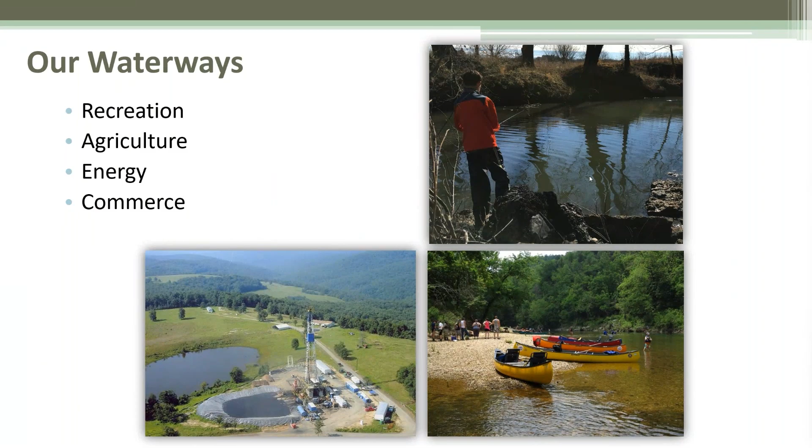So in just thinking about our waterways, water is used for a number of things: recreation, agriculture, the energy sector, commerce. There are all types of reasons that water is important. Not all of those relate to roadway construction, obviously. And if you look at it from just a personal standpoint, we are very insistent that we have clean water. I don't want to drink water that's contaminated.

And for the most part, I think a lot of us actually buy water bottles to make sure we have clean water, or we buy filters so that we can use filtered water and that type of thing. So as a culture, I think that we all feel like clean water is absolutely necessary to our day-to-day activities.

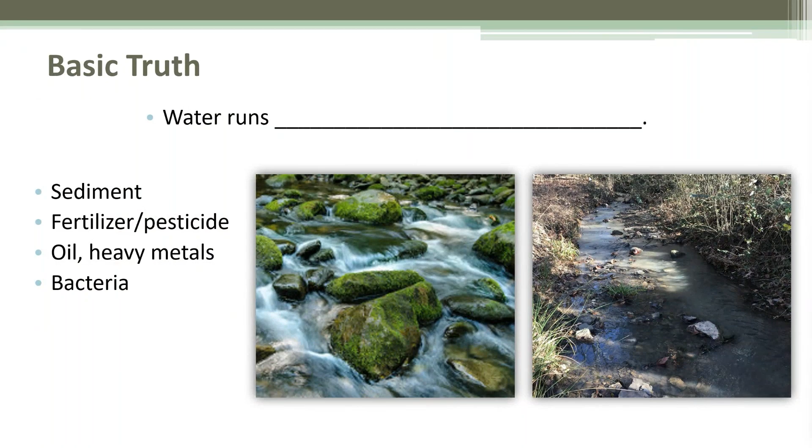So one of the things I want to start out with that is kind of silly, but water runs downhill. We all know that. That's not new.

Good news is you didn't pay for this webinar. So it is a free webinar, free information.

But the important thing about this is that when we start looking at a lot of the other details of this class, it's all going to stem from the fact that water runs downhill. So if the water runs downhill, anything else that's in that water is also going to run downhill with it. So sediment, that's going to be traveling downhill as the water moves.

If we have any fertilizers, pesticides, oils, heavy metals, bacteria, anything that's counterproductive that's in that water source, it's going to be traveling downhill. So all of those things are in motion and they're going to go other places. And usually those other places tend to cause some issues over time.

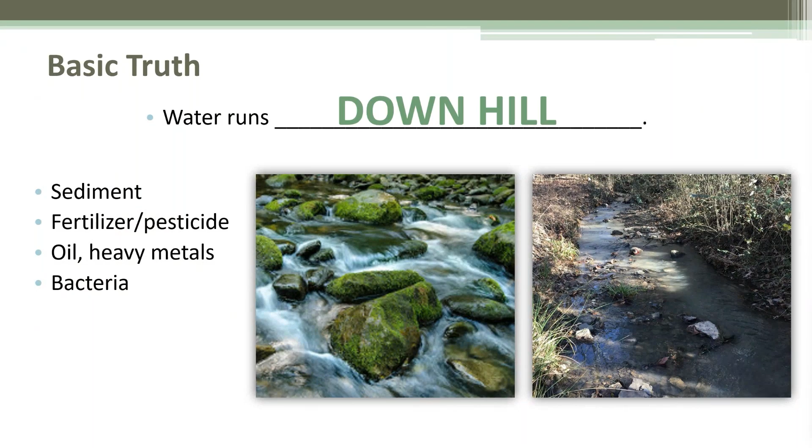The other thing we know is that water is extremely powerful. The more water you have and the steeper the slope that it's on, the faster it's going to move. So increasing the volume and increasing the velocity is going to give that water a lot more power. So think about Niagara Falls. It's a fantastic place to see. I recommend that everyone go there just to see that, but it really brings home how much power that water has. So when we have a heavy storm event, it makes sense.

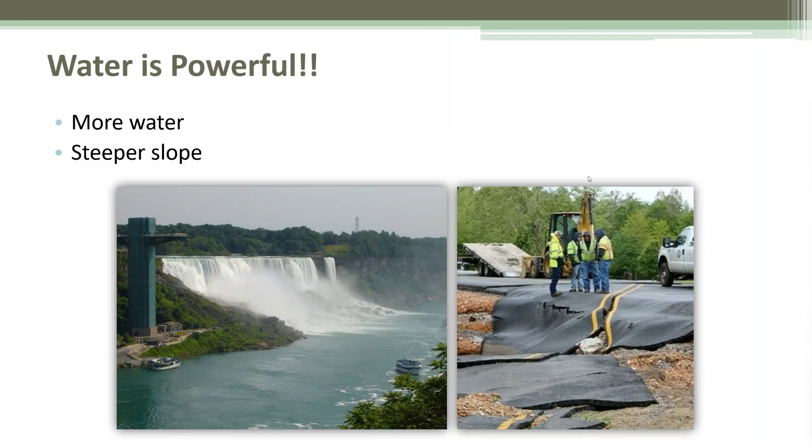Along with that, construction is widely known as one of the biggest reasons that we have erosion and sediment. We're one of the major actors in some of the sediment, which is considered a contaminant in our water sources. So if you look up stuff, way back, we're looking at 30, 35 years ago, this has been a thing. And we've taken steps and made progress in doing a better job. And that's really what this entire program is that we're going to be talking about today, is doing a better job of not being the bad guy, so to speak. But construction still kind of has that stigma.

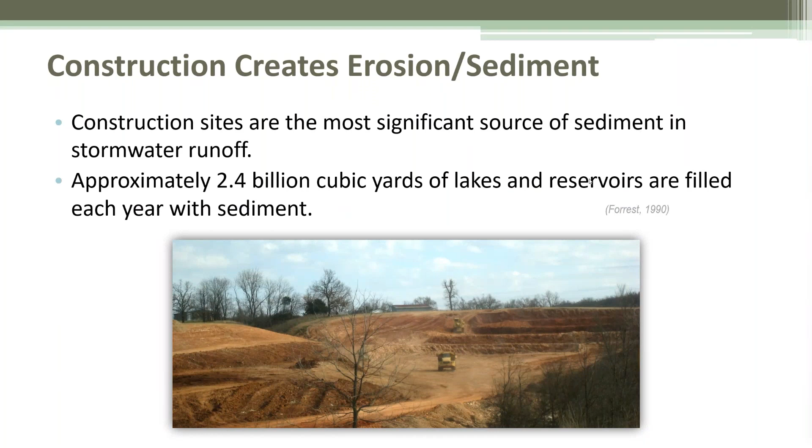So lots and lots of lakes and reservoirs are affected by sources of sediment every year. And when you think about that water running downhill, maybe we've got a construction site that's at the top of a hill, and any erosion and sediment from that runs downhill, because we know that's where it goes, it's going to end up going into some type of water body. Maybe it goes in a roadside ditch, then to a stream, and that stream leads to a larger stream, which leads to a river, which leads to maybe a lake. But those larger water bodies can tend to take on all of this sediment. That's kind of that ultimate landing point for the sediment.

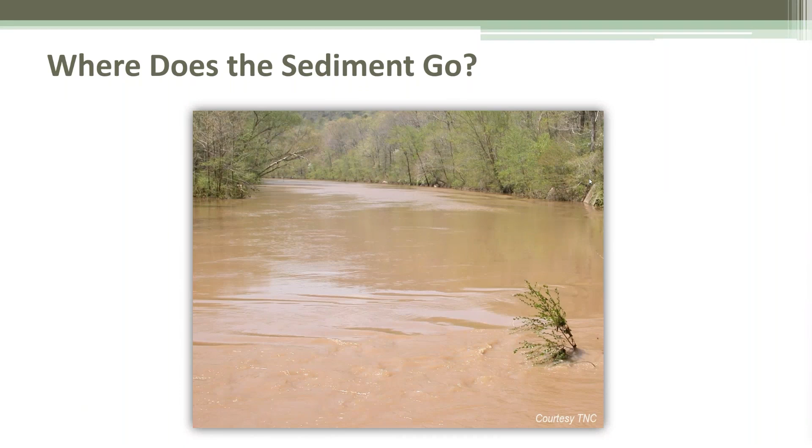And when we have too much of that in that water source, what happens if that water source is a public drinking water supply, or a number of things? But that sediment is going to continue to move downhill with the water, and it contaminates those larger bodies of water that we use for a lot of other things. That sediment can change the shape of the bottom of that water body. It can silt it in, and we lose some capacity on the bottom, and it just changes the dynamics and hydrology overall.

Now, erosion is kind of the culprit. This is where it all starts. And erosion is defined as the process by which the land surface is worn away by the action of water or wind. So this is where individual soil particles get knocked loose from their natural location. So things are kind of falling apart.

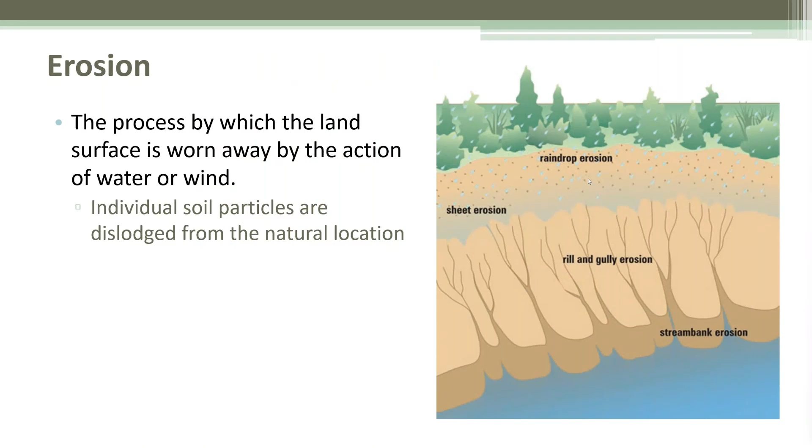There are a number of types of erosion. One of those is raindrop erosion, and that's erosion that stems from raindrops actively hitting the surface of the soil, kind of blasting those little soil particles apart. And so that loosens them or dislodges them.

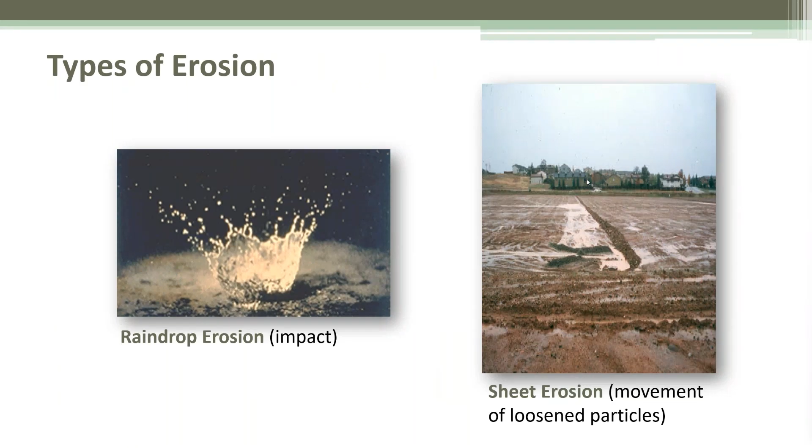We might have sheet erosion, and this might be a situation where we've got a subgrade or a pad built, and then we get a lot of rain. We have kind of that layer of water that's just sitting, but water runs downhill. So even if it looks flat, like what's in the picture, water is going to find the lowest point. And when that water tends to move as a sheet all together, we get the friction between that and the soil particles, which also causes those particles to loosen.

And that becomes a channel, which then is even more downhill. So a particle of water running down the slope will also kind of fall into those crevices and create a larger volume of water in that exact location, which makes it worse and worse. As that gets worse, then we might have what we call gullies, and that's a bigger channel of concentrated flow.

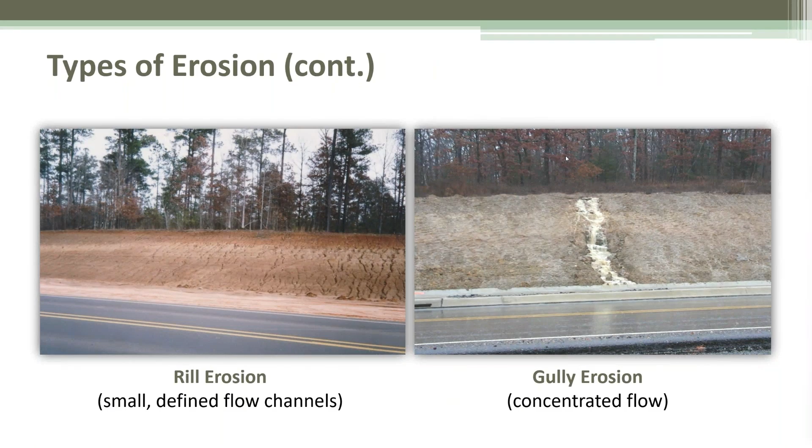But that is something that's sort of related to what we're talking about today, not necessarily directly, but a lot of times we have roadways that are nearby a stream. And when we start to see the shape of that stream change over time, and that scour moves the edge of the stream toward a roadway, that can start to encroach on our roadway structure.

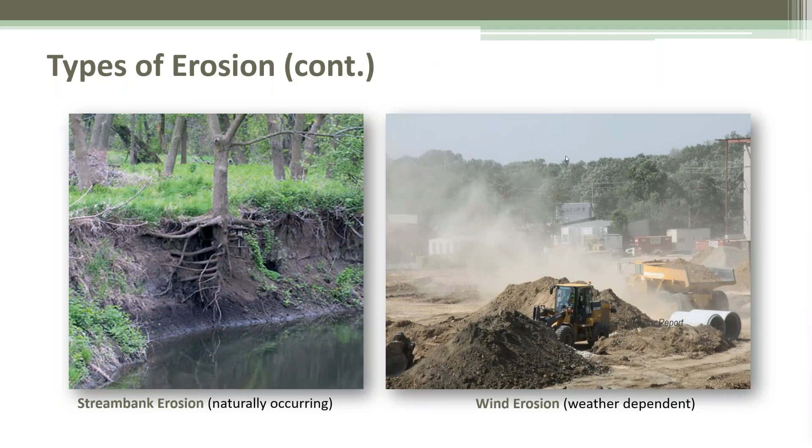And then wind erosion is one that maybe sometimes we don't think about as much. We think about water creating a lot of erosion, but especially out west, we have lots of times where it's maybe hot, dry, arid climate, but a lot of wind. And when those particles are able to be picked up and carried in suspension by the wind, then we've got soil particles that are dislodged from their natural location. Whole different kind of erosion there, but still we're losing some of that soil.

Now, sedimentation is very much related to erosion, but this is the part of the process where those soil particles move. And so they're going to go somewhere, and it's easy for them to move because the erosion caused them to come loose. Now they're going to move, and they're going to move usually in the direction that the water is moving because they're carried in suspension, or even if it's in the wind, in suspension with the wind.

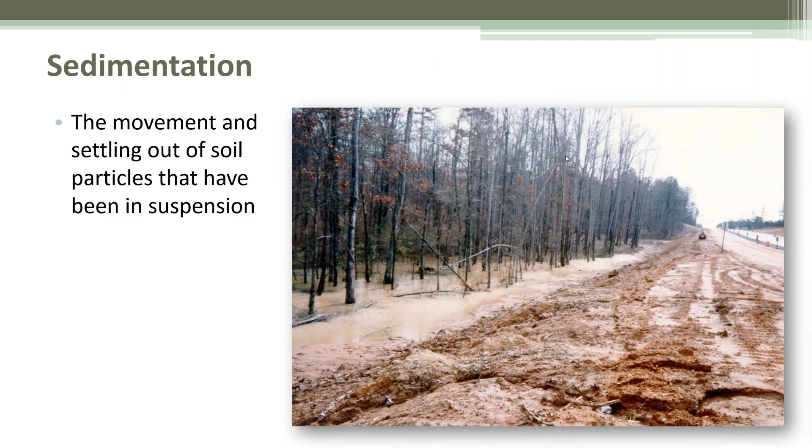The lighter the particles, the longer they're going to travel. The heavier particles will go for a time, and then they will tend to settle out because they're heavier. They will sink to the bottom, and eventually there won't be enough motion to carry them any further. So sedimentation is kind of where they move and then where they settle. So we'll see deposits of sediment in different locations that are downhill from where that particle started out.

Different soil types have an impact on how that actually happens. So sandy soils tend to have higher permeabilities. In the grand scheme of things, sands, silts, and clays are the sizes of soil particles. The sands are the largest of the three. They tend to be fairly spherical in shape, so bigger rounded particles. Imagine a stack of marbles or ball bearings. There are spaces in between those, so we have relatively high permeability and can absorb a lot of water.

So when it takes on that water, we have a little bit less runoff, and because those particles are heavier, those particles don't tend to go quite as far as some of the lighter ones. Now, silty soil, silts tend to have a similar shape to sand. There's still going to be those rounded particles, but they're smaller, so they pack together a little bit tighter. But since they're round, they don't grip together as well, and they're not heavy enough to hold themselves down, so they tend to be much more erodible. So even though they have a little bit reduced permeability, they are the small particles, and they will just take off when the water hits them hard enough.

Now, clayey soils, clay is a little bit stickier. The runoff doesn't tend to pick up clay quite as easily as silt because clay particles are a different shape. They tend to sort of stick together because they have that additional plasticity, and they stack together more like plates. They're fairly cohesive and stable, but they can actually be more erodible sometimes when they're dry. They're those tiny dusty ones. Clay is 0.002 millimeters or less when you take an individual clay particle, so very, very tiny.

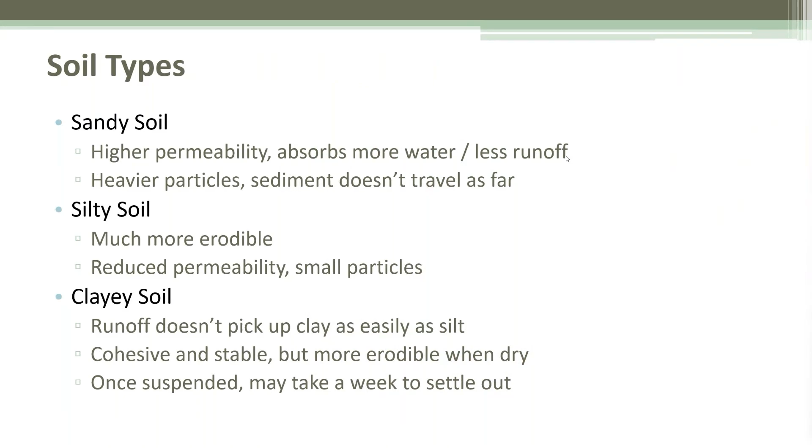Now, if we go back a bit in history, back to 1972, that was the time frame where the environment became very important in the context of national legislation taking place to protect the quality of our environment. So you saw the Clean Air Act, the Clean Water Act, and so on. And the Clean Water Act was specifically to protect the health of U.S. waterways. And to do that, they developed a system called the National Pollutant Discharge Elimination System, or NPDES. That is a program that's administered by the EPA specifically to provide for that national legislation. The Clean Water Act essentially says, don't pollute the water. NPDES says, here's how we're going to make that happen.

Almost every state in the union also has a state level agency. In Arkansas, it is the Arkansas Department of Environmental Quality. It was ADEQ. Technically now it's the DEQ, but I think most folks still refer to it as ADEQ, so same thing. They are the ones who actually issue the stormwater permits. So at the state level, they have a lot more active oversight. The EPA has oversight of each state, and so on.

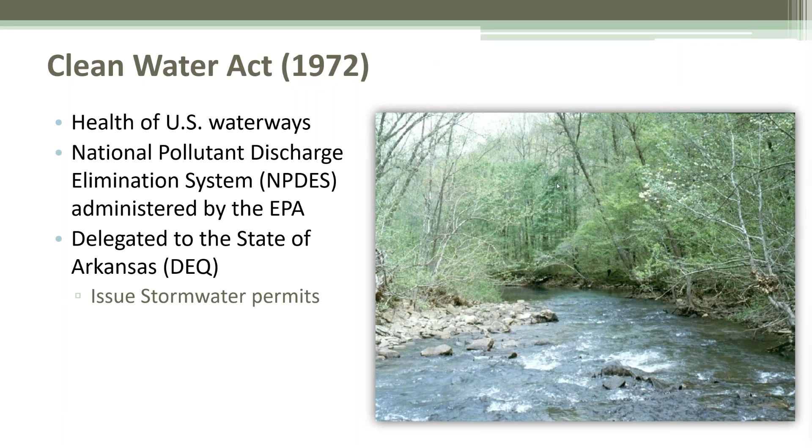In Arkansas, we have some laws that deal directly with the fact that we're not allowed to pollute waters. One of those says that it shall be unlawful for a person to place or cause to be placed any industrial waste or other waste in a location where it is likely to cause pollution of any waters of this state. There's another one that says that it shall be unlawful for a person to purposely, knowingly, or recklessly cause pollution of the water in a manner not otherwise permitted by law. Overall, there is no manner that is permitted by law because it's illegal to pollute our water bodies.

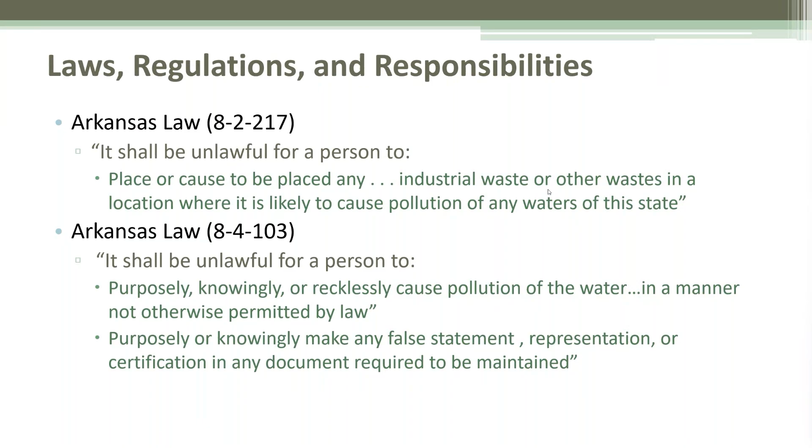And another part of that says that it's unlawful for a person to purposely or knowingly make any false statement, representation, or certification in any document required to be maintained. And today we're talking about regulations and documentation. There's a lot of documentation that goes along with stormwater permits, NPDES, and all of that. Now, if we don't follow the rules, we don't play by the book, and we violate those laws, then there are penalties that will have to be paid.

So we have to have a permit to do soil disturbing type activities. If we go on without getting the proper permits, or maybe we violate that permit in a serious way, it can be up to $16,000 for a violation. If that happens to also include an endangered species violation, that number goes up to $25,000 per violation. And that doesn't sound like the end of the world.

It's definitely a lot of money, but consider that each additional day that violation is active, it's considered to be a separate violation. So if you were penalized for a situation and it took you 2 weeks to get that resolved, that is $16,000 times every day that violation still exists. That's going to add up very quickly. And then above all of that, the EPA can also assess civil penalties. As far as I know, they've not increased this at this time, but up to $187,500. That one's pretty significant.

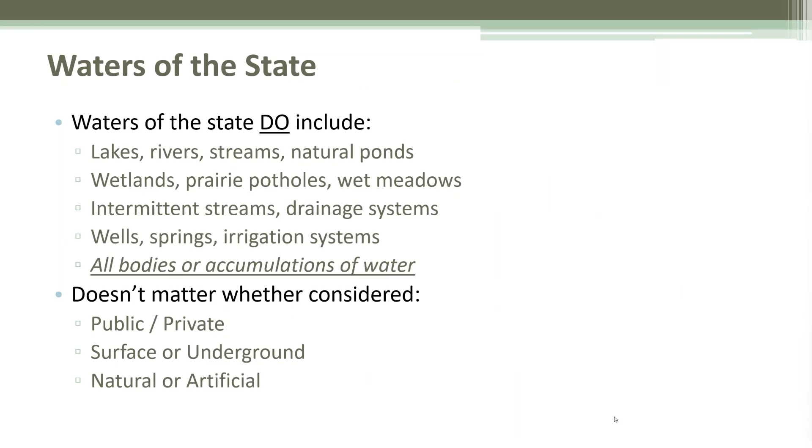We have steeper topography. We have a lot more variety of elevations. So when we start thinking about water moving downhill, the steeper the slope, the faster it goes. So we have a heavy rainstorm and things move pretty quickly. They're going to flood quickly, they're going to clear quickly, whereas the south and east portion of Arkansas is much more flat. So there's a lot of area for the water to go, but if it floods, it takes forever for it to work its way out, or I guess sometimes it just has to evaporate.

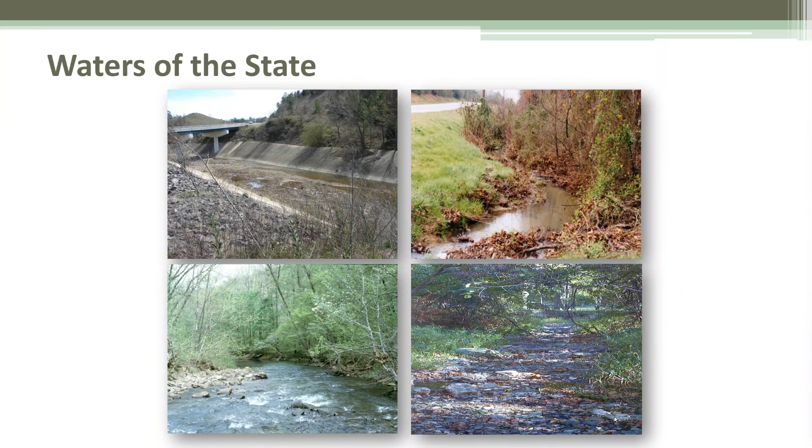But it's a whole different dynamic in how we're going to deal with these because of the differences in the topography. But the more hilly areas you have, the more likelihood you have of those intermittent streams.

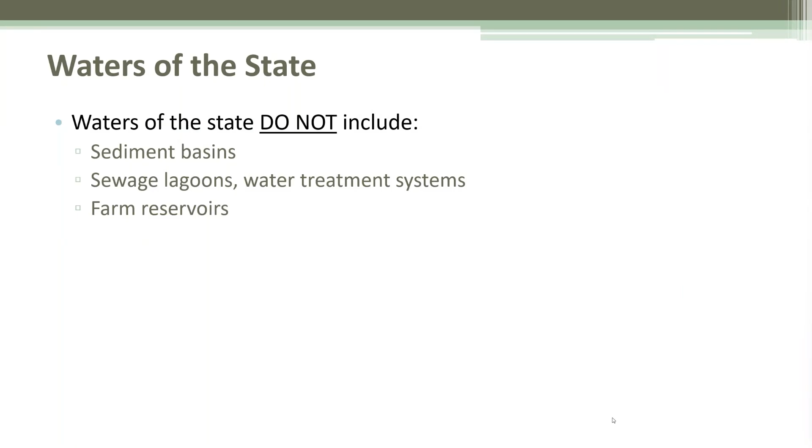Now, there are 3 categories that are not included in waters of the state definition. One of those is a sediment basin, and that is one of the best management practices that we'll talk about next time. And it's designed specifically to assist with erosion and sedimentation. So for all of this NPDES stuff, this is one of the ways that we're going to manage and keep our water clean. So obviously it's designed to include sediment, so we're not going to count that. And then also sewage lagoons, water treatment systems, those have their own set of rules. And then farm reservoirs are also considered exempt.

In terms of authorities, we've mentioned ADEQ. We've talked about the EPA, the Environmental Protection Agency. That is the national level that oversees the state level agency. But we also might interact with U.S. Army Corps of Engineers. We might interact with U.S. Fish and Wildlife, Arkansas Game and Fish Commission. We might interact with an MS4, that's a municipal separate storm sewer system. And a lot of the cities and towns in Arkansas will be part of an MS4.

Then there's also a QLP, that's called a qualifying local program. And that is kind of like you have the EPA, then you have the state level agency. If you were to have a local level of that oversight, that would be a QLP. Hot Springs is the only one in the state of Arkansas right now. Their whole name is Hot Springs. They're all about water. They have a lot of tourism. It's very important for them to protect the quality of that water.

And so essentially what's happening is that ADEQ says, hey, Hot Springs, you obviously see the importance of keeping your water clean. We're going to turn over all of this oversight to you. You will issue your own permits and do your own thing. You will kind of take care of anything for a smaller job site. For large job sites, ADEQ still has the authority, and then ADEQ will oversee that QLP and just make sure that they're doing what they're supposed to do.

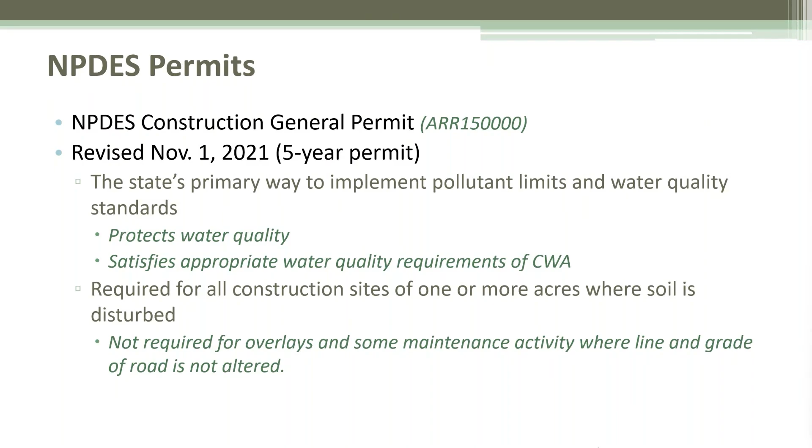All right, so we know that if we disturb an acre or more, the permit is required. Aside from that, we also have 2 categories of project size, and that is either small or large. A small site is considered less than 5 acres. A large site is 5 or more acres. Now, big picture is that it doesn't matter what size. If it's 5, more than 5, less than 5, doesn't matter. We're going to do the same things on the ground that need to be done to prevent polluting those waterways. But there are some distinguishable points that paperwork is going to be different. So the things we do will be the same on the site. The paperwork that we have to prepare will be a little bit different.

So in general, just think of it as we're going to treat everything as a large site. ARDOT actually states that every project is considered or treated as a large site, just paperwork is different. Keep in mind that things like clearing, grubbing, excavation, demolition, constructing a haul road, all of those things that sometimes are extraneous to the core area of the project itself, those are ground disturbing activities, and those are going to require the permit as long as it's an acre or more.

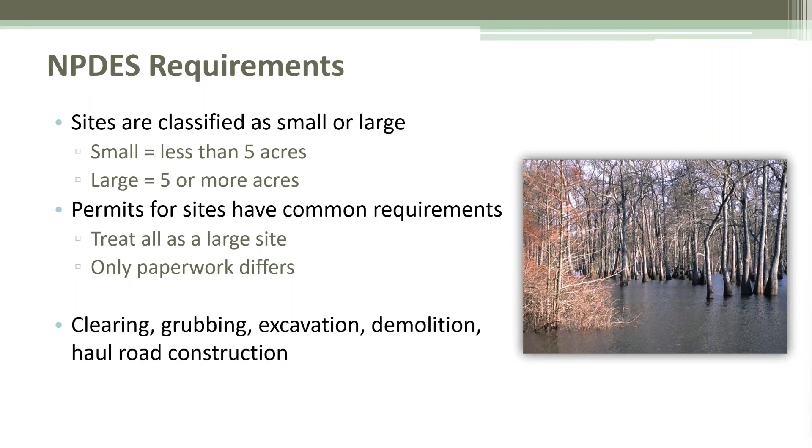So do you need a permit? If it's new construction and a large project, which means 5 or more acres, yes. If it is a small project, less than 5 acres, that's still going to be a yes if an acre or more is disturbed. If you are doing maintenance, grading your unpaved roads, you do not need a permit. If you're doing patching, overlays, chip seals, you do not need a permit. If you're widening, you do.

If you are cleaning out ditches, you also need the permit because that is actively disturbing the ground and it's in a location that we expect water to accumulate. So technically, a ditch is a water body. So that would be operating, doing work, and disturbing the ground in a water body. So that's kind of a picky difference, but that means we've got to be really careful for something that you might think of as just kind of everyday cleanup. We've got to have the permit to do that.

Bridges and culverts. If I'm doing that type of construction and I'm in the immediate vicinity of a water body, then yes, we absolutely need the permit, but we're also going to need a lot of other things. We'll talk about those later. The STAA, short-term activity authorization, 404 permit, and so on.

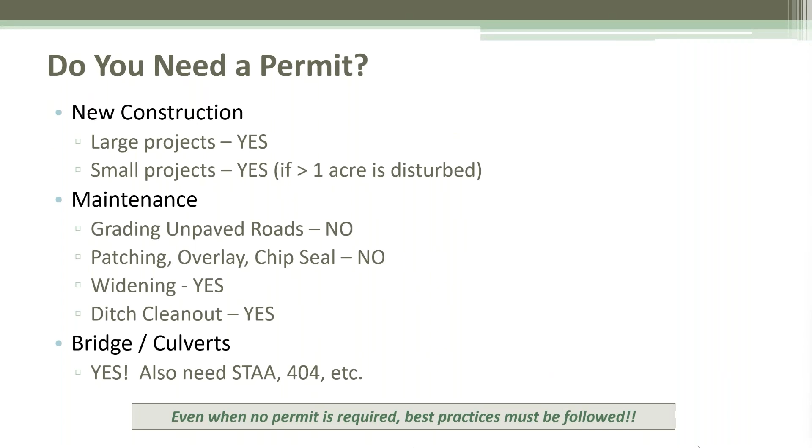But all of these things, I'm telling you, here's the letter of the law. But in concept, it doesn't matter if you need the permit or not. We're still obligated to follow best practices and try to keep as much sediment out of our water bodies and the potential for sediment in water bodies to an absolute minimum. So even if you don't have to have the permit, you're not excused automatically from everything.

All right, the permit process. How does this work? Well, ADEQ or DEQ has to know that you intend to do a project. So the first step is to submit what's called a notice of intent, the NOI. You will also prepare a stormwater pollution prevention plan, which I call a SWIP.

I've heard it called a lot of things, SWIP, swoop, swope, SWIPy, SWP, SWPP, all that kind of thing. It's the same thing. It's the big document with all of the information. So we're going to complete an application online that says, hey, ADEQ, I've got this project. Here's what I want to do. That notice of intent tells them some of the information about that project. The SWIP tells them a whole lot about that project. And we have to submit those 2 items at least 2 weeks prior to the start of work.

Now the NOI form, there was a form that you could print off and then everything's gone digital. It's great. The e-portal is much faster, much simpler, and you get results a lot quicker. So I don't have a copy of that form in your handouts to show you, because it is all online. So you create an account, you submit your info, it goes through the channels. There is also a fee. Now, this is for kind of the large site, big construction project.

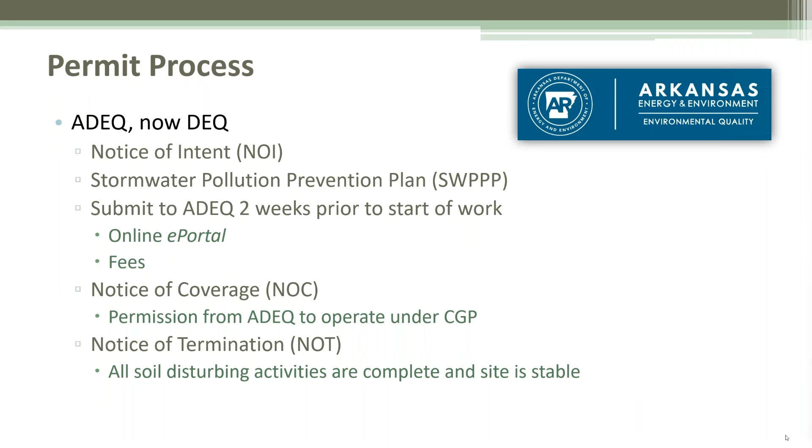Now, work in a water body. This is a little more sensitive because if you lose any sediment from your job site, it's already right there at a water body. So you have very few chances to catch it before it can contaminate that water. So anytime we're working in or in the immediate vicinity of a water body, this is going to be things like bridge or culvert construction. If you're putting in culverts, box culverts, pipe culverts, if you're doing any channel alterations, even debris removal, trying to clean out a stream to maybe promote some of your drainage pathways. A lot of maintenance activities kind of fall in this category as well.

Then you have to not only get permission from ADEQ, you also have to get a 404 permit. That comes from the Corps of Engineers. So that is referring to Section 404 of the Clean Water Act. And that is going to use a little bit different definition for your water bodies. Instead of waters of the state, it's going to be waters of the United States.

The overall definition tends to deal a little bit more with waters that are used for commerce, like things along the coast where you may have offshore fishing, any type of commerce that way. Arkansas doesn't deal with that because we obviously aren't on the coast, but still the language is going to kind of route us right back around to what we've already used for waters of the state.

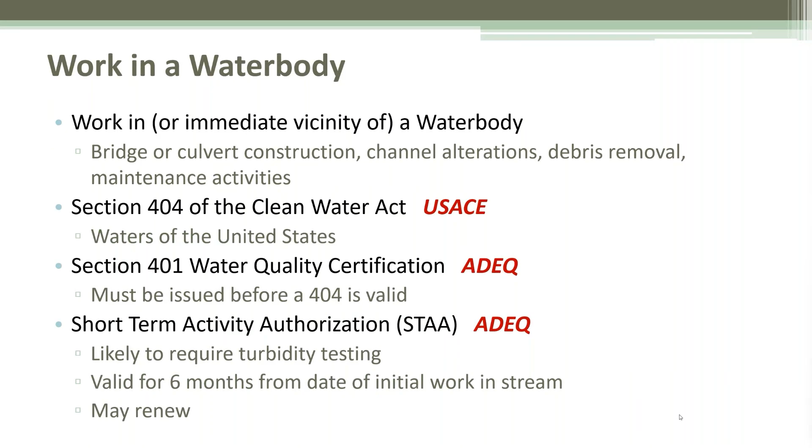And then also during that 6-month time frame, they're almost always now requiring some turbidity testing. So there are some testing requirements, and you have to submit those results periodically. So what is turbidity? Turbidity is kind of a fancy word for dirty water. So it's technically a measure of the clarity of water, and it can be measured by passing a beam of light through a sample of the water.

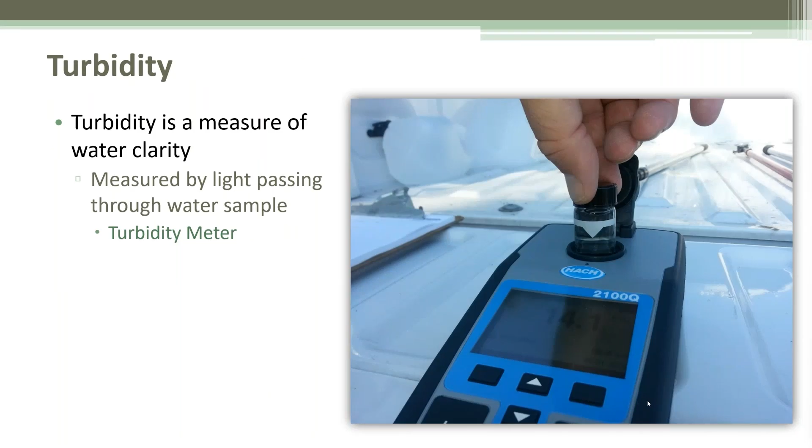So that turbidity meter is pretty cool. It kind of does it automatically. You put it in, push the button, and it gives you a number. And so then you report that. I will say that if you use one of these, make sure that your little glass sample containers, keep those clean. If you have smudgy fingerprints on the glass, that will read as turbidity because it's something blocking the light. So make sure that you keep the outside of that sample container as clean as possible.

Now, turbidity we don't like because that's an indication that we have sediment in the water. It's murky, it's ugly, it's not a good thing, but it's more than just dirty water. Those suspended solids that are caught up in the water not only affect clarity and color, but also increase the temperature of the water. When you increase the temperature, that will decrease the amount of dissolved oxygen that's available to the wildlife, the fish, and other species that have their habitat there in that water body.

So sometimes you see a lot of increased disease in fish. Some of it is not that something poisonous went there. It's just that we've reduced their dissolved oxygen to a point that they're not able to survive. So it has some far-reaching impacts. And then, you know, everything in nature depends on something else. So it continues to make that chain reaction go along.

All right, so let's back up and talk in a little bit more detail about before construction, submitting that notice of intent. The large sites are required to submit this NOI 2 weeks before beginning work. If it is a small site, you don't actually have to submit this, and that's because they're going to charge, it was $200, it may have gone up at this point, but the large sites do have to pay a fee. And then ADEQ reviews the documents. The big document is the Stormwater Pollution Prevention Plan. This is a complete plan for your project.

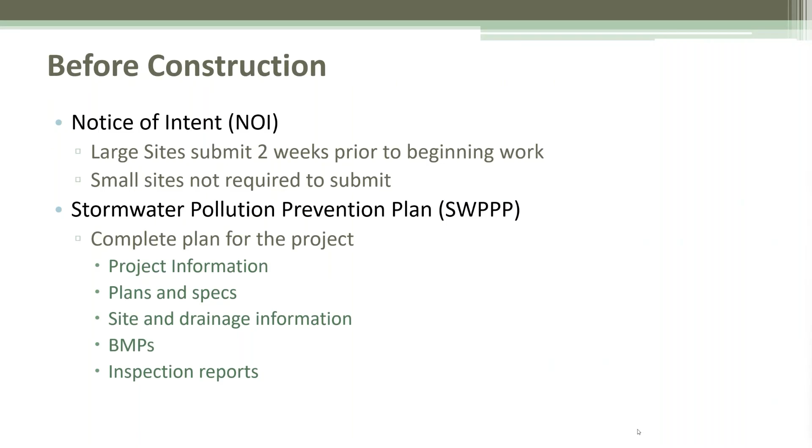So where can you find information on how to do this? Well, if you go to the website for the state of Arkansas, it's adeq.state.ar.us. Down on the left-hand side, there is a button for water permits. When you click there, it will expand and scroll down to the NPDES permits, and there's a list of things there. One of those is the general stormwater permits, and there's one for construction stormwater. That's the one that we are talking about.

On that page, there will be links for some of the forms that you need. There's a link to the permit, some fact sheets. They have most of their forms in PDF or Word form. And again, some of this I'm still showing, but it's actually to be submitted online. There's an inspection form, notice of termination, all kinds of stuff there.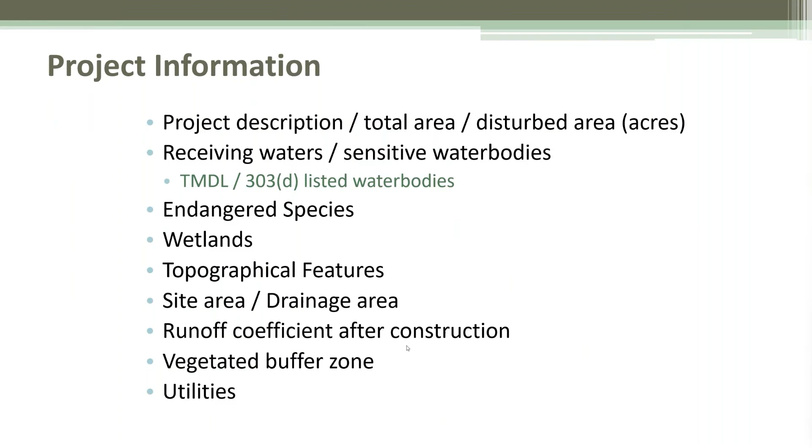We need to know about the drainage area. If my project site is in a low area and I've got a lot of water running toward my project from higher elevations, that's going to impact how I treat things. We'll look at runoff coefficient after construction. Vegetated buffer zones, I've got to leave some space before I get to a water body. And then also utilities.

Now, receiving waters. Well, I'm doing a project and I don't think there's a stream or a lake or anything anywhere close to it, so I don't have a receiving water. Well, there is always an ultimate receiving water. And on the website, there's a map you can pull up.

And if you locate your project here on the map, let's say, I know City of Bentonville is watching with us. So if we're up here in section 3J, the northwest corner of the state, number 3 goes to the Arkansas River. So the Arkansas River comes in on the west side, runs down through central Arkansas. That means that if I have sediment that gets loose from my project, it's going to move and travel and go from point to point and follow the path of water all the way down to the Arkansas River.

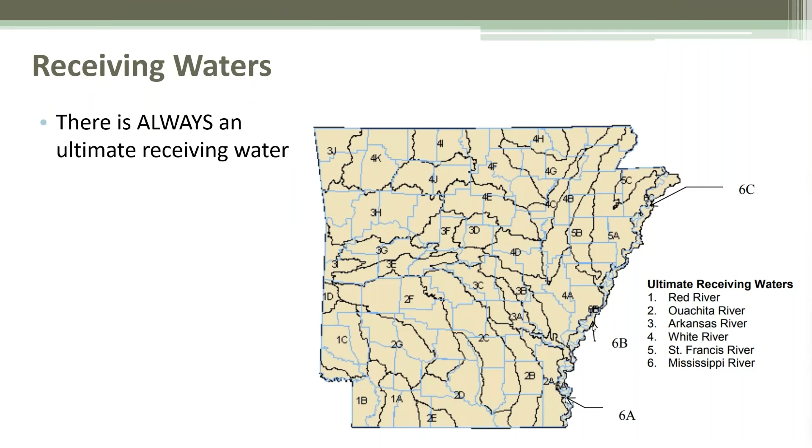Now, if I'm more in the north central portion, all of these are number 4s. Number 4 is the White River. That means ultimately a problem in my project location has the potential to impact the White River. Okay. Down in South Arkansas, we've got the Ouachita River, and the 2s, the Red Rivers, and the 1s, St. Francis River, there's the 5s, and then 6 is going to be the Mississippi River. So there is always an ultimate receiving water. If you're not sure, look at the map.

Now I mentioned the impaired waters, the 303D list. These are water bodies that already have some sort of an issue. And it may not be anything related to construction. Sometimes it is. It could be that they already have maybe a natural problem with sediment, or something else has happened that's created that problem. Sometimes it's a chemical. Maybe it's some sort of toxicity. Maybe the pH level is not good. It could be too many nitrates.

Whatever that problem is, from whatever source it is, we know that there's already a problem there, which means I've got to check this list and see what the problem is, and then determine if my project is going to create more of that same kind of problem. If so, I've got to be super, super careful to not let that be a problem.

The official listing tends to run several years behind. I think last time I updated this, the 2018 was official, the 2020 was still a draft, and that was just a few months ago. So slowly but surely those do get updated. I would look at the draft listings and get the most updated ones. But they do have maps by county.

So on the overall state map, you can see there's little pink lines, little yellow lines, and you can see in the legend what category of impairment that is. And so most of the things that we are concerned with in construction are ones that are already impaired for turbidity, for sediment, and then possibly oil and grease. Those are the kind of things that we're going to see during construction. So if I know that my water body already has that particular problem, I'm probably going to make it worse with my project.

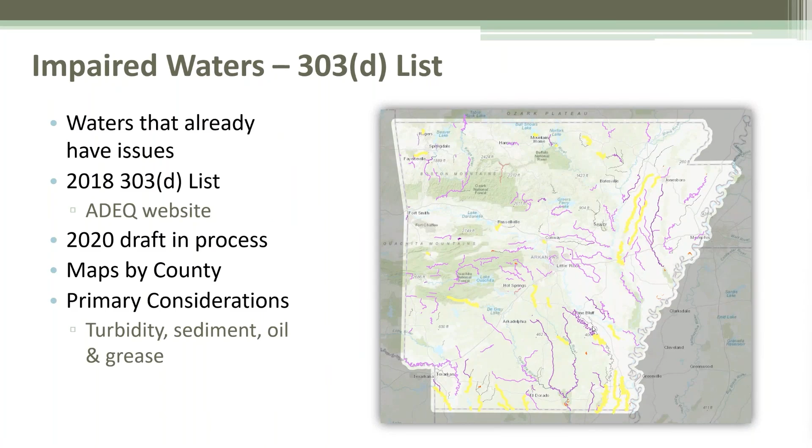There are other water bodies that have special protection, and there are several designations for that. One is ERW, that's Extraordinary Resource Water. Ecologically sensitive water bodies, natural and scenic rivers, public water supplies, cold water fisheries, and then impaired waters also fall on this list. Again, we need extra protection because there's something special about that water body. It might be like the natural and scenic, the Buffalo River, high profile. It's a big deal when something goes wrong or there's a contaminant that's getting into that river.

If it's a public water supply source, that one's kind of obvious. If you have a contaminant that gets in there, that has a big impact on the water treatment system that cleans it for the constituents of that water source. We've got to be able to get it clean. If you put too much contaminant in and can't get it clean, that will impact all the citizens of that area.

The city of Clinton a number of years ago had to invest a lot of money to upgrade their water treatment system specifically for sediment that was in their water. They weren't able to keep up. So it has a huge impact on funding and improvement. So if we could just keep that sediment out of the water in the first place, that makes everything else much easier.

Now, the other term that's on this slide is the TMDL, that's total maximum daily load. That refers to the fact that a water body might already have something, whether it's naturally occurring or is already there for whatever reason, plus the effects of construction. If your project is close to a water body that has a designated TMDL, that means that the total cannot exceed a certain amount.

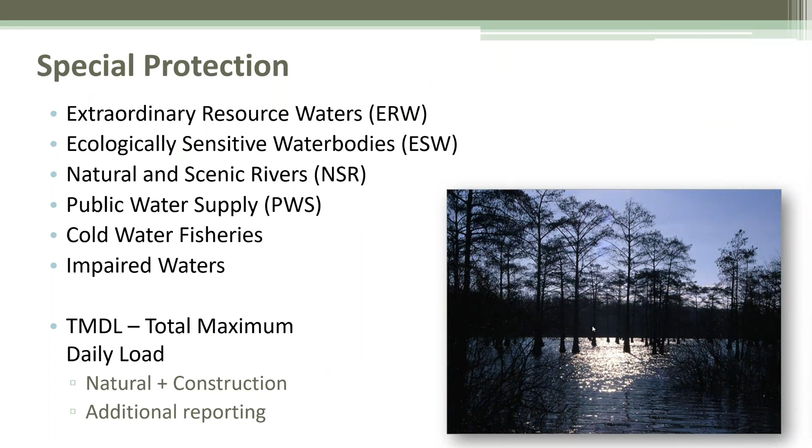Endangered species. This one is the hardest one of all in my mind, just because my background expertise is more in roadways and asphalt and construction, and I don't know much about endangered species. So part of this permit process is to certify that I've done my homework and don't see any issues with an endangered species. I don't really know that. So it's hard for me to feel confident in signing a piece of paper that says, hey, there are no endangered species on my project site. I don't really know that.

There are rules for what you can and can't do within things like 660 feet of a bald eagle's nest. I don't know where those nests are. I don't know where the Ozark big-eared bat lives exactly. But the good news is there are people who do. So U.S. Fish and Wildlife has a lot of information on their website. And really what you're doing when you submit this part of the certification is that you're signing to say, I did the best I could to figure this out. I'm aware that if there is an issue, some things may have to change during construction, but I've done the very best that I can to show that there's not an issue with an endangered species.

If you work for ArDOT, ArDOT has an environmental division that deals quite a bit with this, and they know these kinds of things, so that's great. Otherwise, I would say check the website. U.S. Fish and Wildlife can let you zoom in on endangered species, and they will have color-coded maps that show where you are most likely to encounter some of these certain species.

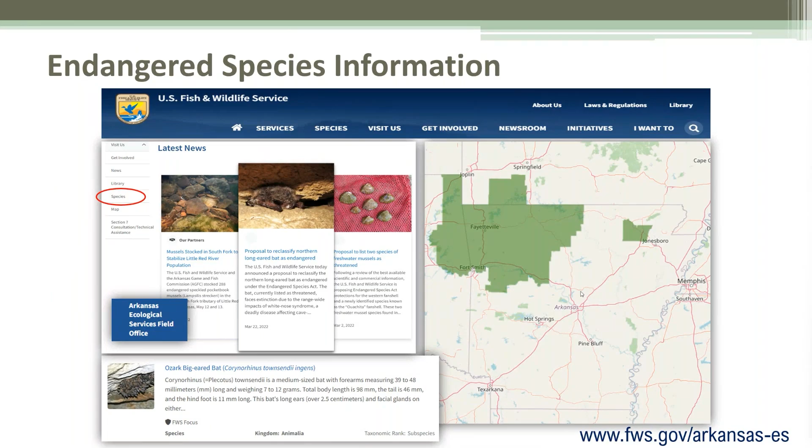So in the northwest corner of the state, the Ozark big-eared bat, they give some information about that, and that would tell me that, hey, I might need to check in on this. Or if I was in central Arkansas, that part's not in green. I know I don't have to worry about that one. That's not likely to be an issue at all. So it at least gets you to a point that you can kind of narrow down some things.

Another thing that we need to convey to ADEQ early in the process are any topographical features. So what I mean here is, where do I have steep slopes? The steeper the slope, the faster the water is going to run downhill. The faster it goes, the more damage it does. So ADEQ wants to know, where are the most likely spots around your project that could be impacted by something like that. So we can pull up a contour map, which is a map that shows lines of elevation.

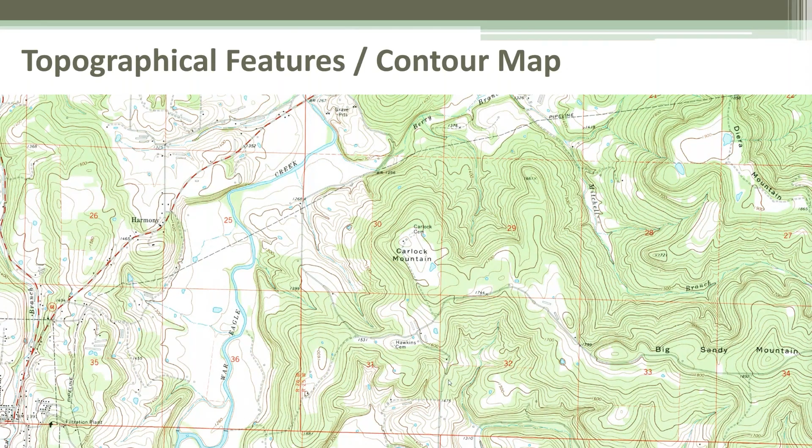And many of you have probably seen something like this, but this is a little zoomed in section of a contour map. And you can see some of the numbers here. So let's zoom in a little more, and you'll see the lines. They all have a 1700, 1600. That is the actual elevation. And then the not so bold lines in between are in 20-foot increments.

What we need to do is look at this two-dimensional piece of paper or screen and say, which way does water go? Well, I need to know the elevations. As the elevation goes down, that's the direction water is going to go. And the water will run downhill perpendicular to the contour lines. A contour line is a line of equal elevation. So if you were to walk along one of these lines, you would not go uphill or downhill. If you turned and veered off, you would go up or down.

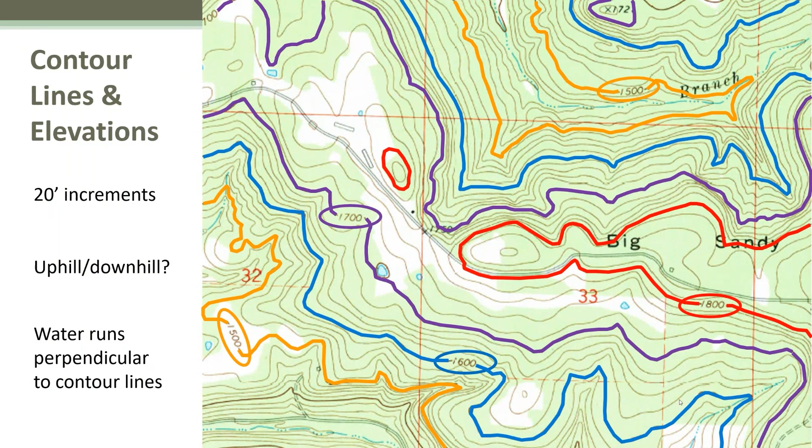So these orange ones, if you find the 1500s and trace that line, the lines in orange are a 1500-foot elevation. And then the blue ones represent 1600, the purple is 1700, and the red is 1800. So as I go from orange to blue to purple to red, I'm traveling uphill. Flip that around. Where's water going? Red to purple to blue to orange. So now I can start looking at that, and if I know that water runs perpendicular to these lines at any given point, I can draw arrows that show which direction water is running.

Now also notice, sometimes you'll have, hopefully you can see my cursor here, a little divot in that line, that little bump. That kind of shows a path where water will tend to concentrate. Up here in the 1500, that orange area right up at the top on the right, you also see a little blue line. It's a dash dot dot dot. That represents the path of a stream, and that makes sense. That follows what we would expect given the layout of those contour lines.

So which way is that stream running? Is it running to the left or to the right? And well, everything is concentrating. It's moving toward the center, that lowest point, and then it is moving toward the left.

Okay, so if we look at a topo map, now I suddenly have a really good idea of where the water is going to be, and I can put that in context of where my project site is and note, do I have water running onto my job site? Do I have water running off of my job site? Do I have areas of both?

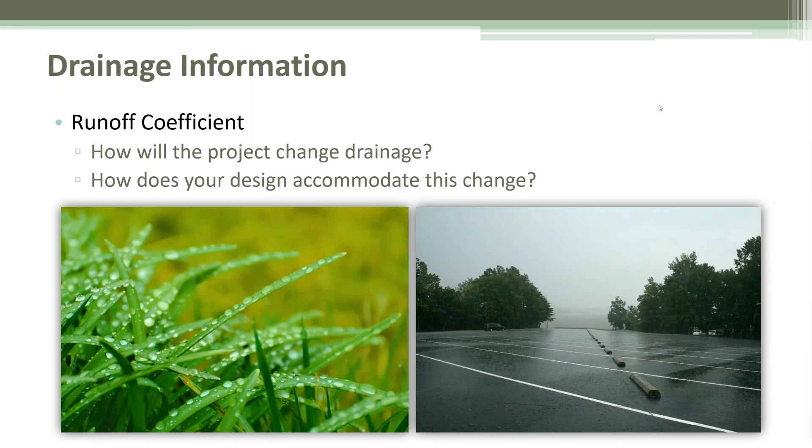Okay? Now, if that water body is impaired, or it's one of those special categories, or for whatever reason there's something special about it, now that goes up to 50 feet. So I can't do any clearing within 50 feet of that type of water body. Sometimes there will be a really special, super sensitive situation. The ADEQ director can change that from 50 to, I've heard, as much as 125 feet, where you're not allowed to get in there and clear.

Now, you're already thinking, if I'm building a box culvert and I can't get in that area and do any digging, how am I going to get it built? Well, you can do that work, but it has to be justified in your SWPPP document. And that's pretty obvious. You can't build it if you can't get there. So you have to have a good plan in place to keep sediment from getting into that water body as much as possible. So as long as you can justify it and show that you've thought through that process and you're going to do the best you can, then it's most likely that will be approved by ADEQ.

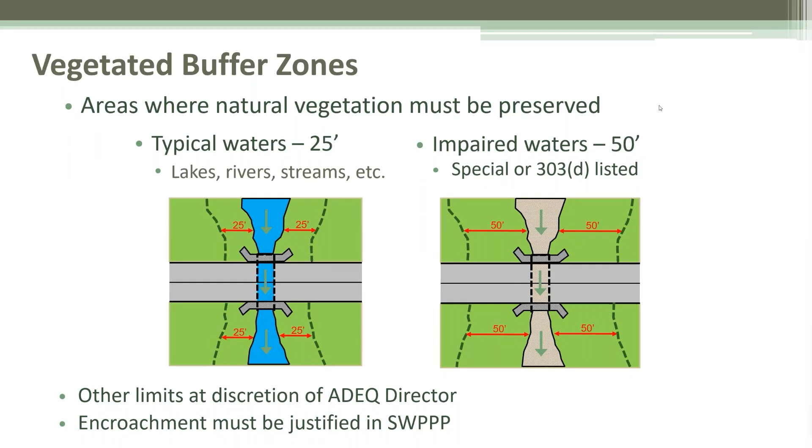All right, so here's another stopping point for any questions that have come through. Okay, we have had one question come through. Are you only required to get a permit when it could possibly affect a waterway?

You are required to get the permit anytime, but it's based more on the fact that you're disturbing the ground and the size of the project. So if it's 1 acre or more and you're disturbing the ground, you are required to get that permit. So even if it's way out in the middle of nowhere and there's no waterway, there's still the potential for water to run downhill. It's going to go somewhere. It's going to end up in a water body eventually.

So like we looked at that map, that ultimate receiving water for Bentonville is all the way down in the Fort Smith area. It doesn't even have to be close. It still can have an impact, and that's why you still have to have that permit. Okay, that looks like that is everything. All right, and I will make one comment because these are things that I've heard ADEQ talk about.

Subdivisions: if you have a lot of individual lots, like quarter-acre lots, and there are 50 of those, well, the overall development is more than 5 acres, obviously. So you've got quite a bit of area that's being managed. But each individual lot is only a quarter of an acre. You're not excused from the permit. They consider the development as a whole. So you have to have the permit for something like that.

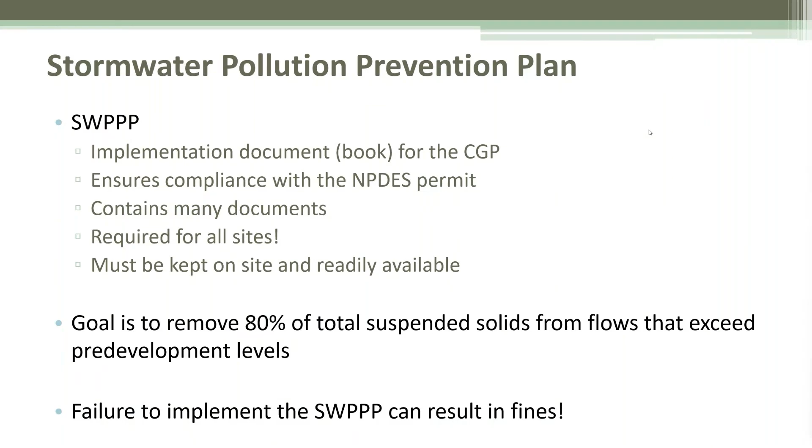We have to maintain this standard. 80% is usually a B in class, so we've got to at least make a B on our sediment control during the project. If I don't do that, or if I don't do the things that the SWPPP said I would do to try to manage all of this, then I can get a fine.

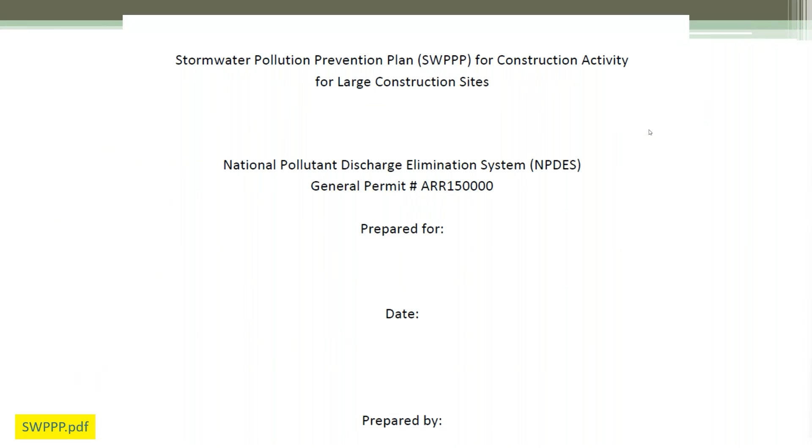Now, one of your documents in the handouts materials tab on the webinar controls, you can download the SWPPP. This is a SWPPP template that is on the ADEQ website. So this kind of outlines what all kind of stuff they're looking for. So we'll go through some of that. First, project name and location, parcel number, address, operator name. Some of it's the same as what's on the notice of intent, and that is so that it can be easily matched for review purposes.

They do want to know the sequence of major activities that disturb soil. So let's say that you're going to replace a bridge. First of all, you're probably going to build some type of a temporary bridge to maintain traffic while you demolish and rebuild the main bridge. So that sequence of how you're going to move traffic, what major parts of construction are going to get done when, you're going to pour footings, you're going to place the superstructure. What are those major events that are going to happen?

They want to know the total area, the disturbed area. And by the way, if you put those numbers in here and then need to change those later on, you do need to let ADEQ know about that. We talked about runoff coefficient. They want the level pre-construction as well as post-construction. So how is that going to change based on your construction project? And then they want a description of the soil or the quality of any discharge from the site. So right now, hopefully there's no discharge of sediment, but what type of soil do you have?

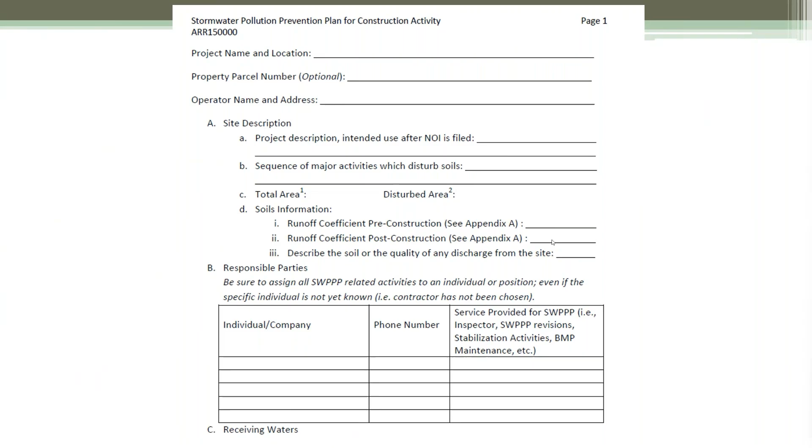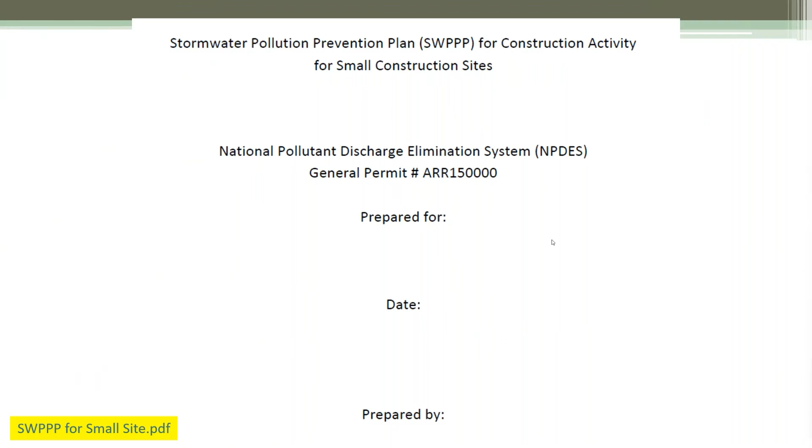This is one of your other handouts, and this is the SWPPP document for small construction sites. These are not quite as involved, so fewer pages, smaller book, that kind of thing, but a lot of the same concepts are there. So just another version that you have available.

Now again, the SWPPP is required for all sites, whether it's large or small. The difference is large sites, you have to submit the SWPPP prior to starting the project, and it has to be approved by ADEQ before you can start work. For small sites, we're just going to prepare it, put it together, and keep it on site. I don't have to get prior approval.

I don't send it to ADEQ, but if something happens and someone calls in and says, hey, they're really making a mess over on this project, and they decide to come over, ADEQ pays you a visit, wants to inspect. When they get there, they expect to see that SWPPP document. They will ask for it. If you don't have it, that's a violation of the permit because you're operating under the permit even though you did not file a notice of intent.

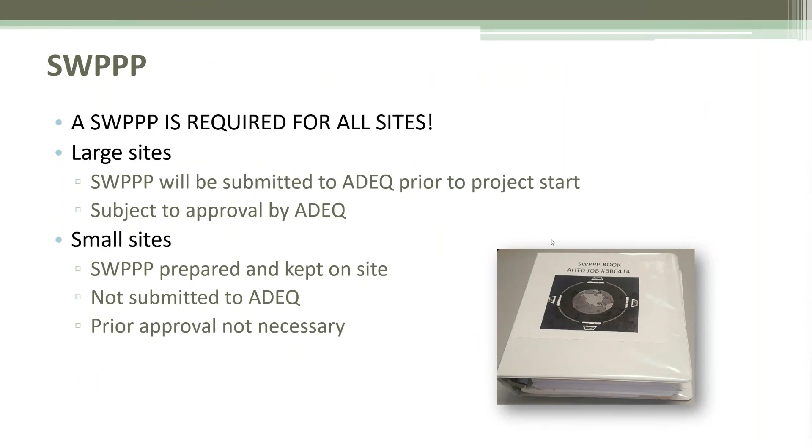So it's kind of the short track to get in and get things going, but you still have to follow all those same rules. Now, the purpose of the SWPPP document is to make sure we comply with the permit. It gives us a way to document a plan, steps us through how are we going to identify these sources of pollution. It's going to describe what types of techniques and items that we're going to put in place to keep erosion and sediment from happening. Those are BMPs, and that's really the focus of the next webinar.

It gives ADEQ a lot of information, but it also helps the designer. Because when you design the project and you think through all this stuff, it's hard to convey that to everyone who's going to be involved with the construction. So we have to communicate that by plans and documents and so on. And that's what the SWPPP is. So it's helping the designer get that message out to those who are going to be doing the construction and inspection. But it also helps the ones doing the construction and inspection to do all of this management of stormwater without having to come up with it on their own.

Years ago, it was one of those things where we know we had to pay attention to it, and a lot of times it was left up to the field personnel to figure out, how do I manage this? How do I prevent erosion? How do I control sediment? And so you had to come up with all this stuff. But the designers are the ones who are trained usually more specifically, and so now the field guys don't have to think of everything on their own. They have something to work from.

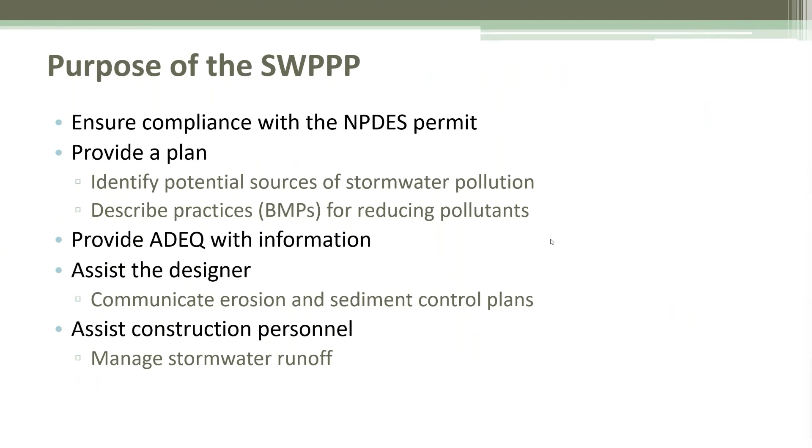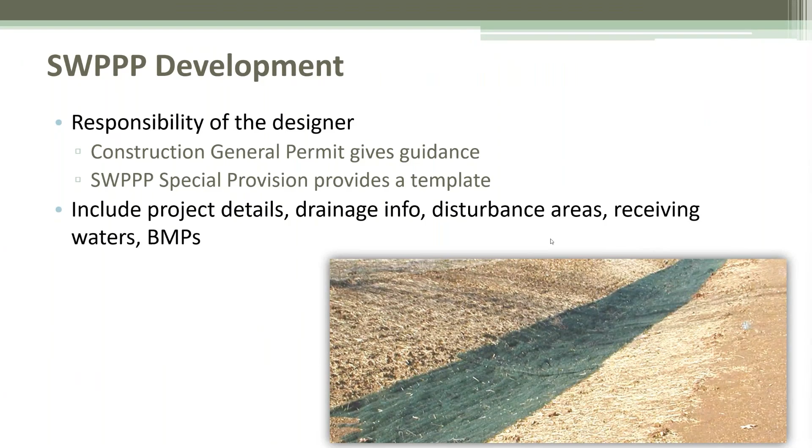Since it is the responsibility of the designer, the designer is obviously going to use the permit for guidance. And that SWPPP special provision template that I've given you is a good way to get started. Make sure you don't miss something. But all of those details, drainage info, disturbance areas, at least a lot of that gets done before the project has started.

Now, if you have a specific project contract, all of that is information about the project. That becomes part of the SWPPP. So if you have a set of plans, that's part of your SWPPP because it says what's happening with the project. It's not just the things that deal specifically with stormwater. It's really the whole thing. We've got to have the big picture of what's happening within this project.

Make sure your contractor and subs sign it and are aware of what else is going on. Think about things too, like hazardous materials handling. We're thinking about sediment, turbidity, oil and grease, that kind of stuff, but are there any hazardous materials that you will have on site for the project? If so, how are we going to handle that? We don't want sediment in the water, but we also don't want poisonous things in the water. So anything hazardous, think that through.

And that might be just things that are used for some of the construction vehicles that are on site. Maybe that's totally on the contractor side of things, but we have to have a plan for how to handle that. Any approved state or local plans that might govern how some of this stuff is done, that is part of your SWPPP. Any TMDL information, any of your other permits, your short-term activity authorization, all of those documents are part of your SWPPP.

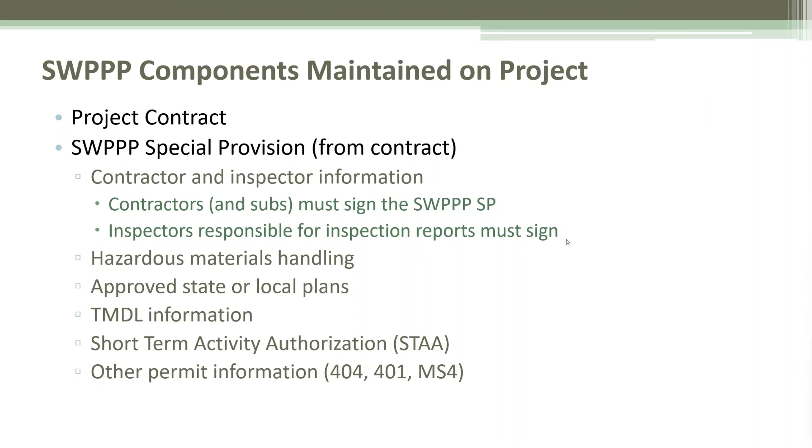The notice of coverage. For a large site, we start with that notice of intent, we get the notice of coverage back. That is a document that goes along with this project. It becomes part of the SWPPP. Your project plans. If they're very involved plans, you usually will have a page that shows some of your temporary erosion control items. It may give you some quantities. That's a great starting point.

You're also going to need to update those for your as-built. What actually got put in place? When did those things get put in place? And so that's something that you're going to document and keep up with and edit week by week throughout the duration of the project. Same thing with inspection reports. Those are going to happen as you go through the project. Anything that's SWPPP-related correspondence, any change orders that might change something in a roundabout way still will impact stormwater. That's got to be part of it.

And a daily construction diary. This is good to do regardless of stormwater, but keep up with what's happening on the project. Sometimes you can backtrack and figure out, oh, this must have happened on the day that this happened. Who was on site? Who would know the answer to this question? Flip back through that construction diary. Just keep good records because it makes everything so much easier when there's a question.

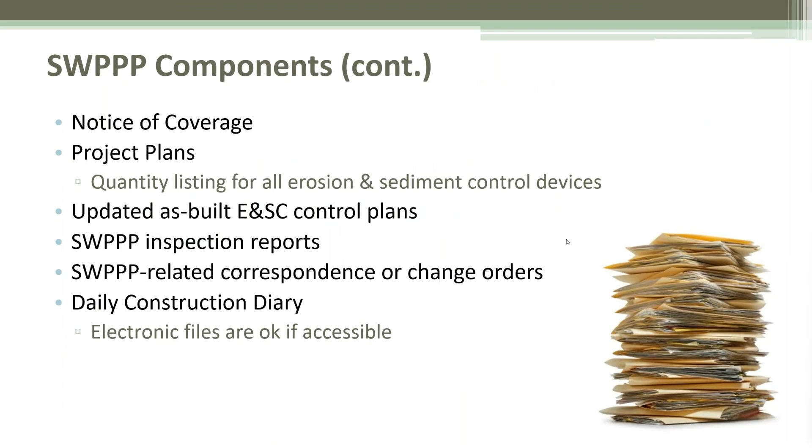Now, at one time, ADEQ was not really a fan of electronic records because when they come to the site, they want to see all the parts of the SWPPP on site for any type of inspection. So it was easier just to have the tangible papers. But now if someone is there who can pull this up on a computer, great, that's fine. Electronic files allow you a lot more flexibility, but the rule is when they show up, they have to see the whole SWPPP. Anything that is part of your SWPPP document has to be accessible at that time. So just make sure you're aware of that when you decide if you want printed papers or electronic.

Things that have to go on your project plans. If you have any waters of the state, and this will be the project site, so it'll be really close, that needs to be marked on the plans. Maybe natural buffer boundary lines, floodplain boundaries, storm drain inlet location, that would be on the project site itself and anything in the immediate vicinity. Locations where stormwater is discharged to a water of the state or to an MS4. Where is that going? Show that location on the plans.

And then you're also required to have a legend for all of your BMPs. So you would want a legend that indicates on this drawing what is silt fence, what is a rock ditch check, what is a sediment basin. So we'll look at that again Tuesday. Any project plan sheets, specifically, do you have certain items? Do you have any temporary erosion control details?

So what I mean by that is, let's say your plan sheet shows that we're going to install silt fence from this point to that point. How are you going to install it? Do you have a detail showing how that silt fence is to be installed? How tall are the stakes? How tall is the fence? How far apart are the stakes placed? That kind of thing. What are the rules for how it's installed? And if there's anything specific to the maintenance of those items, that will be some of those standard things.

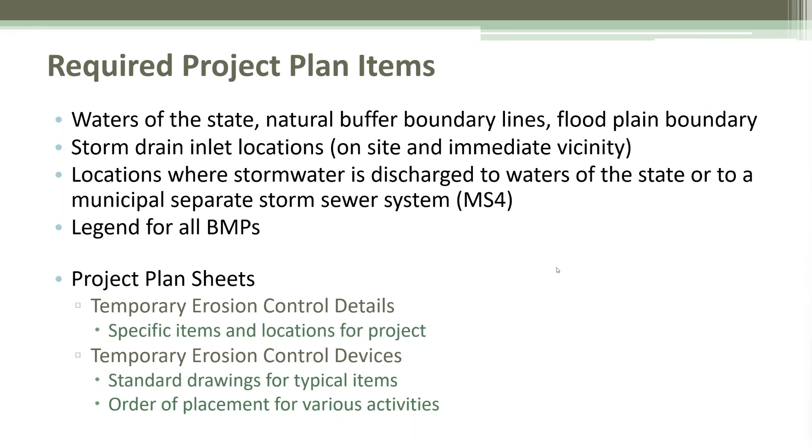And once you come up with all these documents, they kind of become a cookie cutter boilerplate section that you can plop into any SWPPP document. So if you have some standard drawings, some typical language, keep that on hand and put it with every project that you do. And then think about the order of placement. Based on the activities that you have for your project, is there a certain order that's going to work well for you? Okay? And some of that will actually be important.

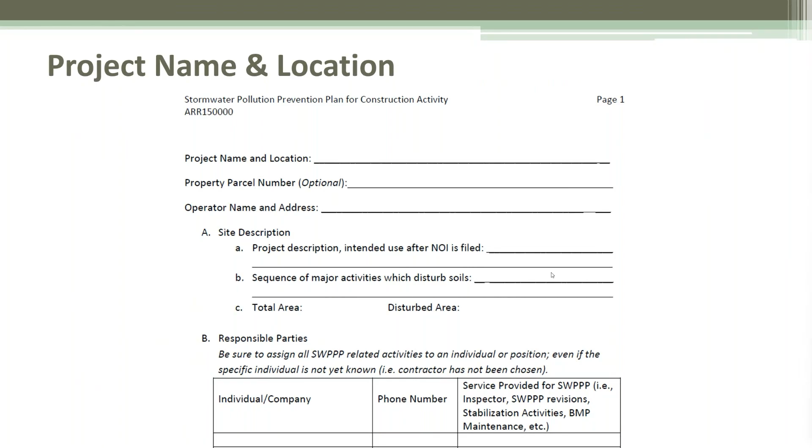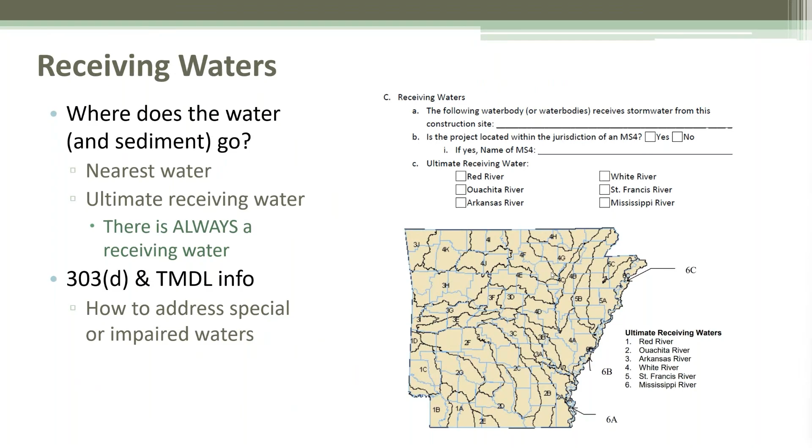So here are some more of the pages of the SWPPP document from the template itself. Site descriptions, responsible parties. Here's the page about the receiving waters. Where does sediment go? What section are you in? Where is that ultimate receiving water? Do you have any TMDL or 303(d) listed water bodies? Okay, how are you going to address that?

And in the site description, all of these details. And it seems like, oh man, that's a lot of stuff to do. But I look at it from a designer standpoint of, oh good, if I check this list off and do all of these things, I know that I'm done.

One of the hardest things about stormwater and designing for this is that it's not like a lot of the other things we do. We're doing an asphalt paving project, you figure a rate, you know the thickness of your pavement, you know the dimensions, everything's kind of an exact number. You run some tests and you get an answer and you compare that to a specification limit. Stormwater is not like that.

Either it worked and you didn't have any sediment, or we got too much rainfall and what you thought would work didn't work and we got to try again. But there's no certainty to it. It just depends on how much rain you get. You could spend a whole bunch of money and put all these things in place and we could have a drought and there's no rain. None of your items really had to do their job. There's no way to know that in advance.

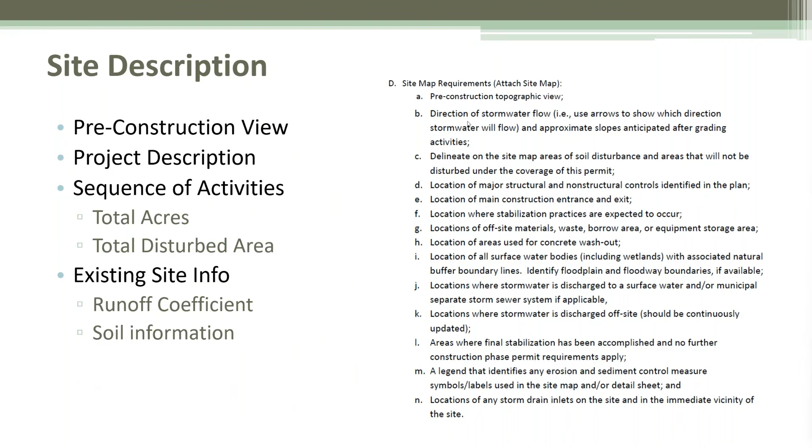But I also know that if you make the assumption the other way, Mother Nature will win. Mother Nature always wins. So doing all the things that need to be done and keeping up with the details is a big job, but it's very important, and it does actually help you know that you did the right things. Now, in terms of your pre-construction topographical map, show those estimated slopes and how they will change after construction.

So in an area of your project, you might have a slope, and when you do this project, you're going to kind of flatten that area out. That's information that we need. Or maybe you're going to cut into a slope and actually make it steeper. That's information that you need. So directions of stormwater flow. And then I've got a note here for areas of disturbance and undisturbed areas.

The less you can disturb on a project, the less impact that erosion will have, because it's not going to erode as easily. So if you can show areas that are not going to be disturbed, that's huge. That's a big deal. So that's a good thing to show. ADEQ does like to see things like that. Where are the locations of major controls? Where are you going to put your construction exits? Where are you going to put concrete washout areas?

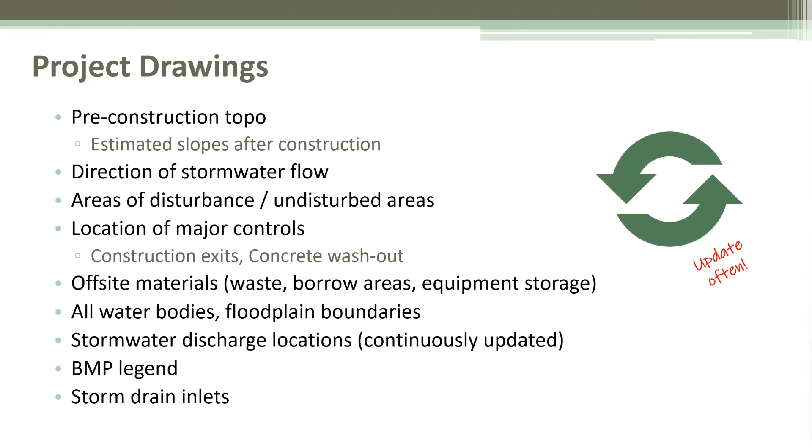What about offsite materials, your waste, your borrow areas, equipment storage, any water bodies, floodplain boundaries we've already mentioned, stormwater discharge, and this is something that's going to change. Maybe from your project site, when you start, water might leave the site over here. But as you move, you disturb the ground, you move the dirt, where it's downhill, later on, you might have stormwater leaving at a different location. So that is something that will be continuously updated. And then again, you have to have that legend, and you also need to show those storm drain inlets.

Now, controls during construction. We're trying to stabilize the site. We're trying to keep sediment from leaving the site. So we're going to look at erosion and sediment controls. I need to have an idea of those construction activities, the general timeline. How am I going to stabilize? Can I do work in this little area and get it finished and then stabilize that area where I don't have to worry about erosion right there? I can go and focus on another area of the project.

So will I have seeding in certain areas? What sediment basin, silt fence, diversion ditches, all of these different BMPs or best management practices. Okay. And then where are you going to put your waste? Where do you put the debris? How are you handling? We mentioned hazardous materials already. Sanitary facilities. Where do your blue rooms go? And then off-site vehicle tracking. How are you going to keep that from impacting public roadways? And concrete waste. Where do you put it?

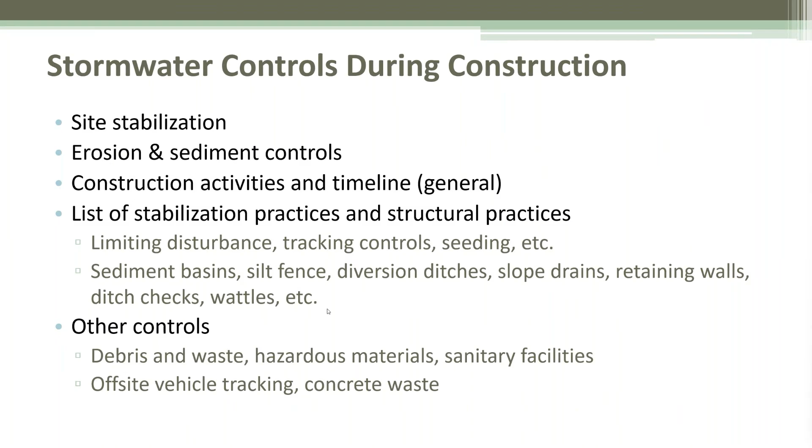So in choosing those, we need to know the site. So knowing everything we can know, from a design standpoint, if you look at state level projects, designers are in Little Rock. Projects are not all in Little Rock. So a lot of times design happens without the designer actually setting foot on the property. If you're in a local agency, I think you've got a much better chance of having folks in your working group that maybe know that area.

And if you've got a field person or somebody that works there that says, hey, I live out here, and when it rains, this spot's always a problem. This always washes out. That ditch overflows. Knowing those kind of things in advance, that's great. So if you don't have someone who can tell you, these are some of the questions that you can ask to try to get a better feel for what that situation is going to look like during a rainstorm, and then choosing the controls that will fit.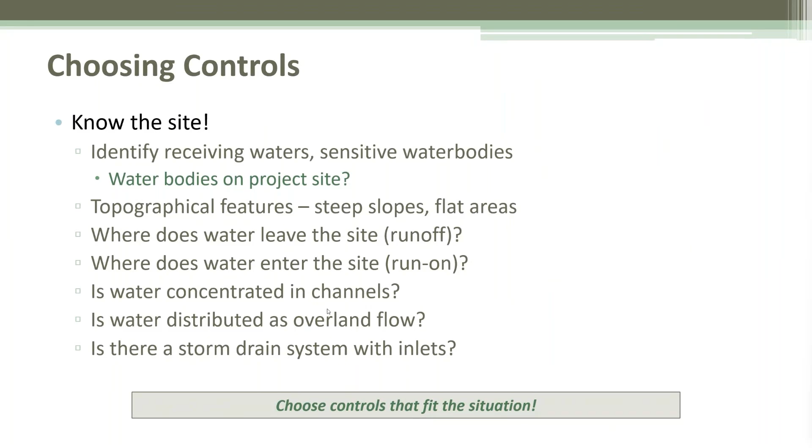Okay, pick controls that are going to work. How do we know they're going to work? Truthfully, we don't, but the more we learn about them, the better job we can do to fit them to the right situation. Will it fit in the location? Do I have enough space? Is it durable enough for the length of time it needs to last? Can I afford it? And when you think about the cost of those materials, is it just materials, or do I need to consider the cost of installation and maintenance?

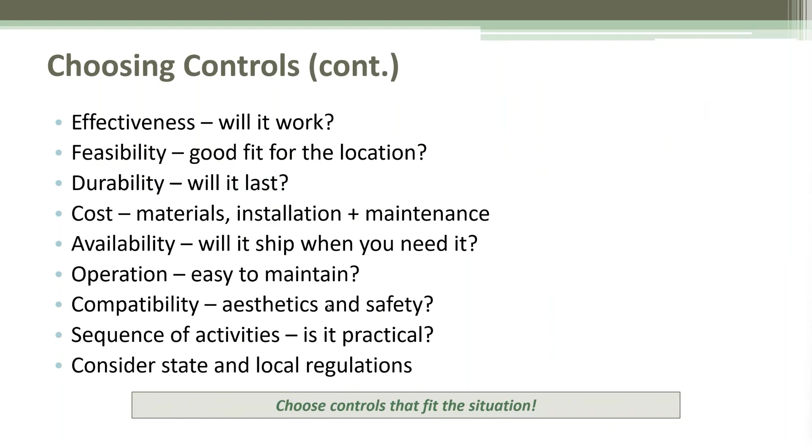If it's kind of an intricate thing, it may be expensive to install. If it blows out and I need to replace it, can I get it when I need it? Is it available? Is it easy to maintain? Is it difficult? Is it compatible? Are there any safety issues that I'm going to create by implementing this thing? If you put something up and it somehow blocks visibility, that could be an issue. Is it practical? Does it fit the sequence of events? And then are there any state or local regulations that say you must use this or you're not allowed to use that? Think through all those questions and pick the controls that fit the situation.

Now, after construction is completed, we've done all of this stuff. We've updated our SWPPP document, done our inspections, and so on. We're going to put permanent controls in place. Everything that I do during construction really is just temporary. Once I get it all stable, everything is permanent in place, it should function on its own without anyone having to go out and look and say, hey, do we have erosion? We shouldn't. We should have a permanent control there that prevents all of the erosion.

So those permanent controls will be things like channel linings, culverts, riprap, sodding, ditch paving, but they're long term. All of those need to have the goal of spreading out the water and slowing it down. So you might have some concrete spillways, or your ditch paving with those dissipators that are in there. Wetland infiltration, anything you can do to continue to spread out the water and slow it down long term, that's going to help you.

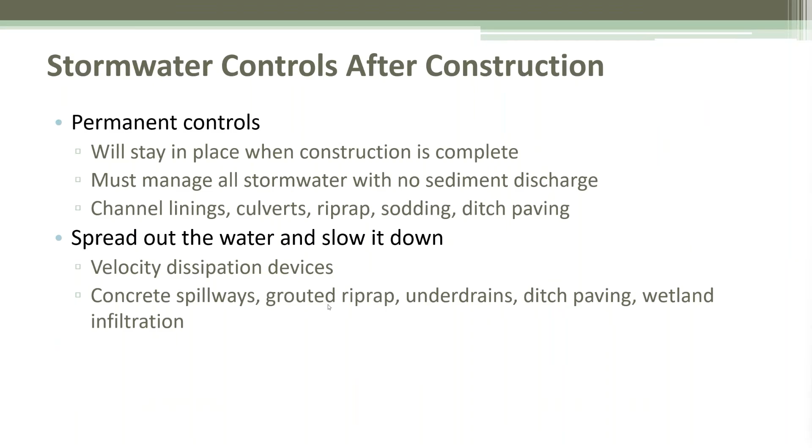And then, of course, finally, the endangered species. Those are all documents that were done early on. If anything changes throughout the project, update those forms. Add that to the SWPPP, put that revision in there. Also, keep up with employee training. Y'all are doing training right now. You'll get a certificate next week. That's something to include in your SWPPP, that your employees have had some training and knowledge of what they're doing.

Pay attention to maintenance. Document the maintenance that's done on the controls. If you document how much maintenance you have to do, you might get a better feel for which BMPs really work better for you. What can you put in place and it just works versus something that maybe is cheaper, but you're having to continually maintain it. And then inspections. Inspection reports will get added periodically.

So we go through the whole project, get all those permanent controls in place, and we're finished. We're ready to say, hands off, everything is stable. Now I'm going to let ADEQ know that I'm finished, and they may come out and do a final inspection. But the other thing I do want to point out here is the notice of coverage. You know, we talked about the notice of intent. ADEQ gives us permission to do the project. But for a small site, we did not submit a notice of intent.

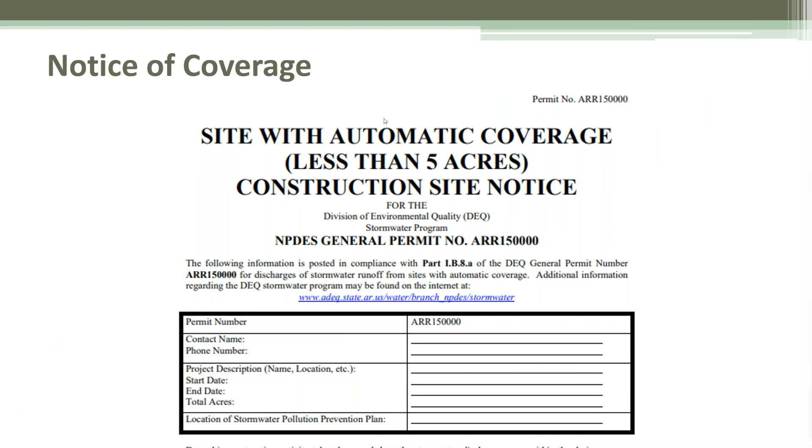That is a great question. That's a little bit complicated. I did mention how a subdivision has the overall development, which is the job site itself, and the permit is required for that. The individual lots can't be considered separate to get out of having to operate under the permit. The other piece of that is that once the developer gets the land and then they partition, they draw up the subdivision, when construction starts happening, it doesn't all happen at the same time. I guess maybe that's not true. In Northwest Arkansas, things tend to get built and sold and occupied very quickly.

But let's say we had a subdivision where over time, a few lots sold, folks bought that, built houses, or maybe a contractor built a few houses on some of the lots. So they own those spaces. The overall development is the one that holds the permit. You can't just say, hey, well, this lot sold, I'm no longer responsible. There has to be a responsible party, and it does get a little tricky, but until most of the lots are built out and everything is stabilized, the developer still holds the responsibility. Typically, a house buyer is not going to put a SWPPP together and get a permit or do any of that kind of thing.

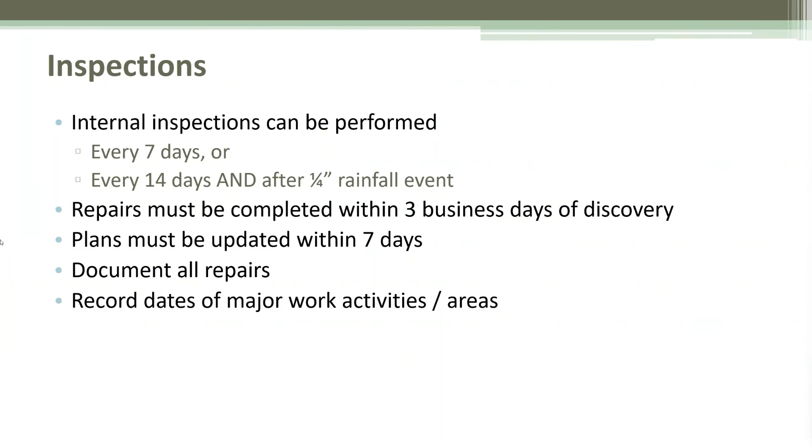Inspections do need to include rainfall data. We need to know when it happened, how much rainfall there was. You need to document any discharge from the job site. Where was it, and was there any sediment in it? Document all those major construction activities with dates, and then looking at the BMPs. Are they working? Number 1. Number 2, are they in need of maintenance? Are they still in good repair?

Were they installed properly? Sometimes a subcontractor comes in and they put everything out there, and most of the time it's pretty good, maybe sometimes not so much. But if it wasn't installed correctly, it's not going to work, and that's going to create future problems. The hardest part is to look at your job site and say, where do I need a BMP, but I don't have one? It's easy to look at the ones that are there and see how they're performing. It's much harder to see something that's not there that should be.

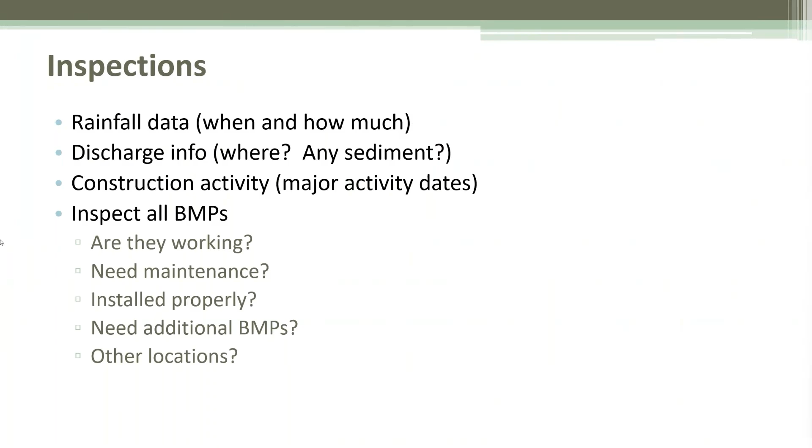And also, it's kind of a personal opinion. So if you get an inspection, say from ADEQ, and you thought through this, and this is what I think needs to be there, this should work, ADEQ comes and looks and says, no, I think you need that. It's very hard to back that up with any factual, numerical type of evidence. Sometimes it really is just personal preference, or who has experience in this area, or I've seen this happen and I think you need to add this. So sometimes you may identify something and it's different from what the ADEQ inspector might see. So looking for those additional locations where something needs to be done, that's tricky.

ArDOT uses their own inspection form, and that has been specifically approved by ADEQ, and it lists all of the types of BMPs that are typically included on an ArDOT project with what to look for, specifics. If you develop something like that, that's great, but you're only allowed to use your own form if ADEQ has approved it. So most people just use the one that they've provided on the website.

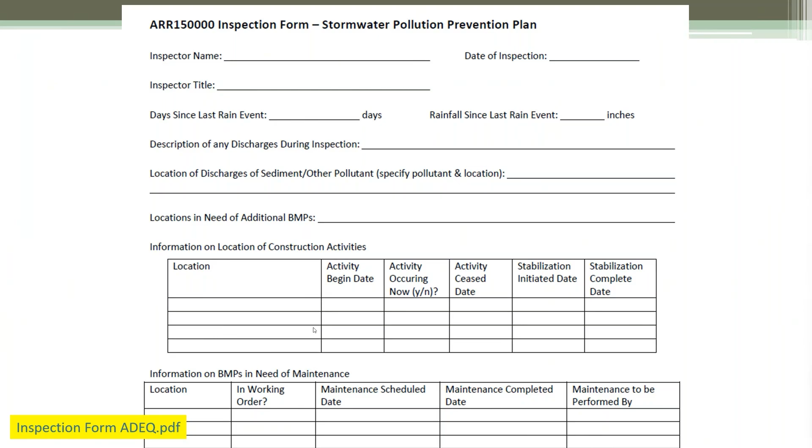So those are the inspections that you do in-house. There are also inspections by other people who come in. Most commonly it will be ADEQ, and most often these are because someone has complained. They've seen mud, or maybe water's running into their backyard, or mud's running onto their driveway, or who knows, but it's usually something that they don't like.

Sometimes it's because mud has been tracked out onto the roadway. They drove by right after they washed their car and it slung mud on their car, and they don't like that. So they knew to call ADEQ. Now ADEQ is knocking on the door saying, hey, we need to inspect your job site, and they're going to look and see what's going on.

Some of the more common problems are that the construction site notice is not posted. That's that notice of coverage. It has to be present. It has to be readable. It has to be there all the time. And really the whole point is that if someone shows up for an inspection and no one is there on the job to greet them, they have a contact name and phone number to get a hold of someone. If they can't read it, you will get dinged. If they can't find it, you will get dinged on that.

Other common problems are the entire SWPPP not being on site. Make sure all those documents stay together. If it means printing out a copy of things that exist in other places, but having a copy to stay right there at the job site, do that. You've probably seen job sites, or maybe you use the big mailbox that's got SWPPP or ADEQ printed on the outside, and that's where all those documents are kept. If it's a large job and you've got a field trailer, maybe it's kept inside that field office, but it's got to be on site so that if someone comes up to inspect, everything is right there.

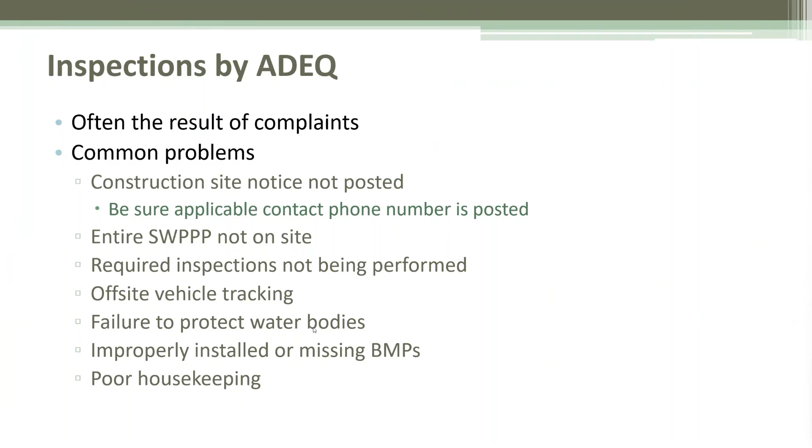They will get you on improperly installed or missing BMPs, and poor housekeeping. Poor housekeeping really is just a first impression sort of a thing. If your job site looks messy, it may give the impression that there are probably some other issues to look for, and it might generate a more thorough inspection. So having a nice clean job site is good.

You can also have inspections from your MS4, that's your municipal separate storm sewer system. And this is really more about coordination than anything else. An MS4 that, say for an urban area, maintains the storm sewer system needs to know what's going into their system. And if you have a project that's going to impact that, they have some responsibilities to ADEQ, and they're kind of the middleman. So a lot of times they will do inspections of projects in that city or that area, and then they will have some things that they require you to do because ADEQ is requiring it of them.

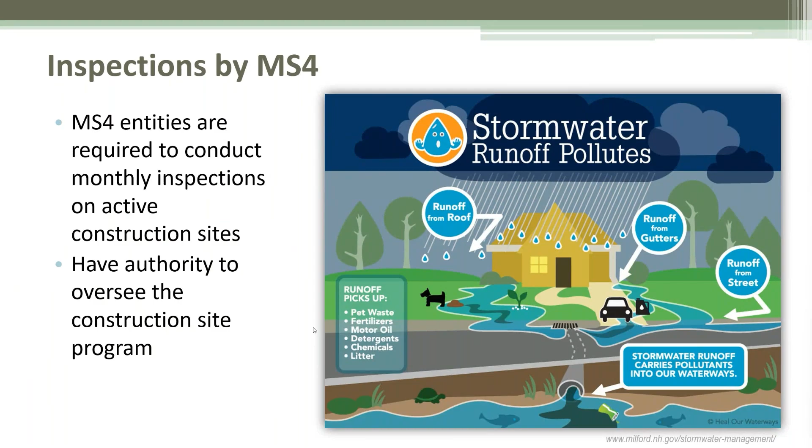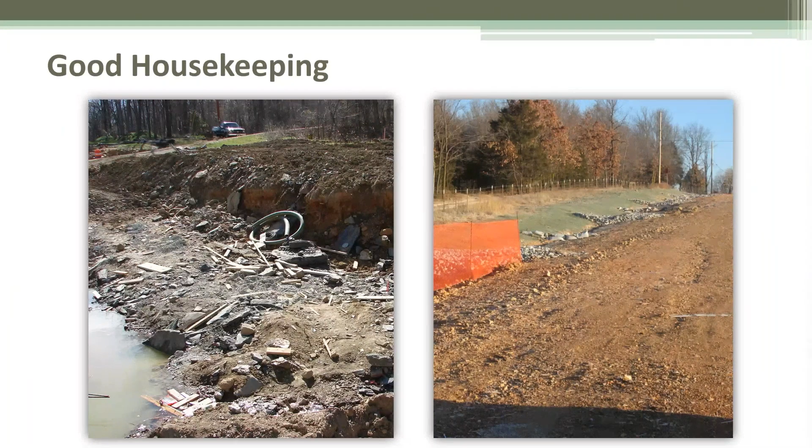And then the very end, again, is that notice of termination. Everything's done. We're telling ADEQ, construction finished. We've stabilized everything. I'm not going to disturb the ground anymore. I don't have any stormwater discharges that are carrying sediment. I don't have any more temporary controls in place. Those have all been removed. Then I'm going to do a final inspection. I'm going to take photos, and that will kind of wrap up all of the paperwork that I need to do. ADEQ may then decide to come out and do an inspection as well.

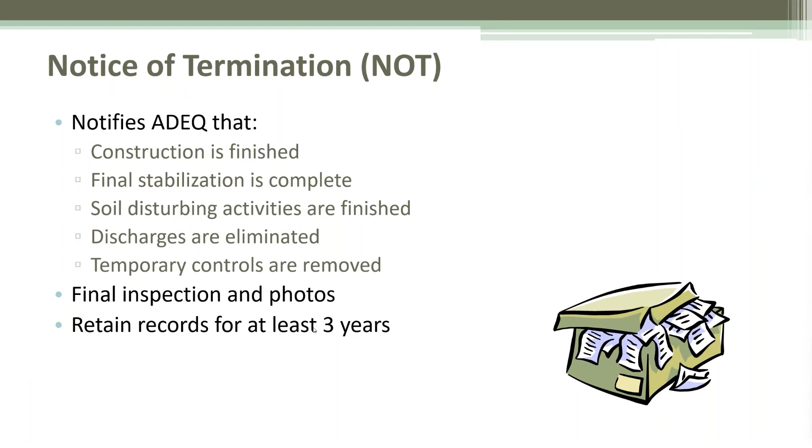They may not. They may be happy with the photos that you took and submitted, but you do have to retain your records for at least 3 years. So if those are digital files, make sure you can access those files for at least 3 years. If it's papers that you put in a box, make sure you know where they went.

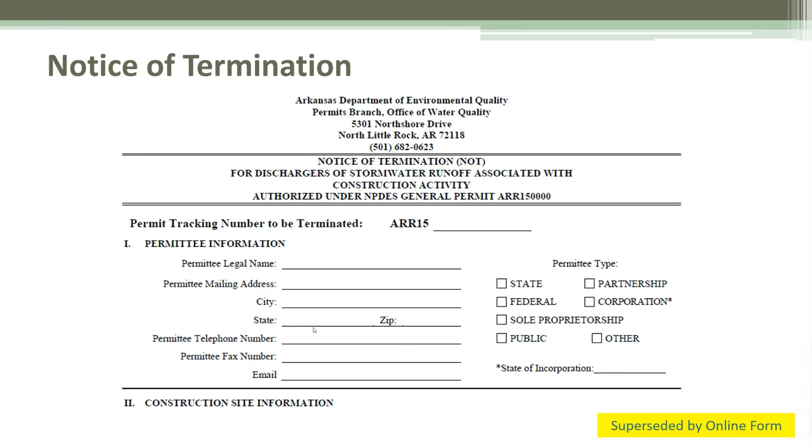All right, any last minute questions? All right, looks like we just have one more that came through, and that is, do you have to have a rain gauge on the job? Aha. A rain gauge is a very good idea to have on the job because you do have that part of the inspection that asks how many inches of rainfall since your last inspection. So they do want to know what are your rainfall totals for a given period of time.

You don't have to have a rain gauge. Some folks will use a weather website that keeps all that information. But most of the time, we have a lot of variety in how much rainfall you get. So what falls on your job site may not really be reflected by what you're finding online. That's more of a general overall area. So it's a good idea to have it, but it's not a formal requirement. Okay, great. Well, I believe that is everything that we have questions-wise.

All right, very good. Well, I have a few questions for a knowledge check, so I'm going to post these as poll questions. I'm going to launch the first one now. What document must be posted at the job site at all times? Do you remember which one that is? It could be the notice of intent, notice of coverage, notice of termination, or the SWPPP. I'm going to give you a couple more seconds on that one. All right, very good. That one is the notice of coverage. That's the one that has to be posted.